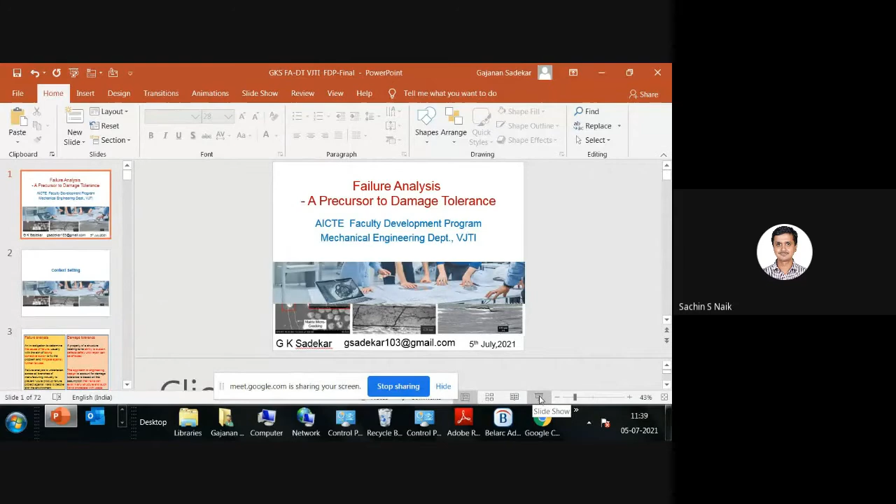Good morning, and Professor Naik, thank you very much for the very exaggerated introduction, but thank you for that. And thank you to you, VJTI, and AICTE for giving me this opportunity to share with everyone my experience, and to participate in this particular program, which is based on the theme of damage tolerance.

When Professor Naik talked to me about this particular course for the faculty development program, I readily agreed. At that time I was telling him that I will not talk on fracture mechanics or damage tolerance methodologies, but rather I'll talk on failure analysis. So he agreed upon that, and my topic's name is 'Failure Analysis: A Precursor to Damage Tolerance.' So in this presentation, let us begin by setting the context for what we are going to do in this lecture.

Damage tolerance being the theme of this presentation, I thought let us deal with how failure analysis connects to damage tolerance methodologies. That's important to understand, because over the next 5 days you are going to cover a lot on fracture mechanics in detail, having already done the first lecture on fracture mechanics. So how that gets correlated to design, and how failure analysis plays a role in this - that's what we are going to do, the context setting.

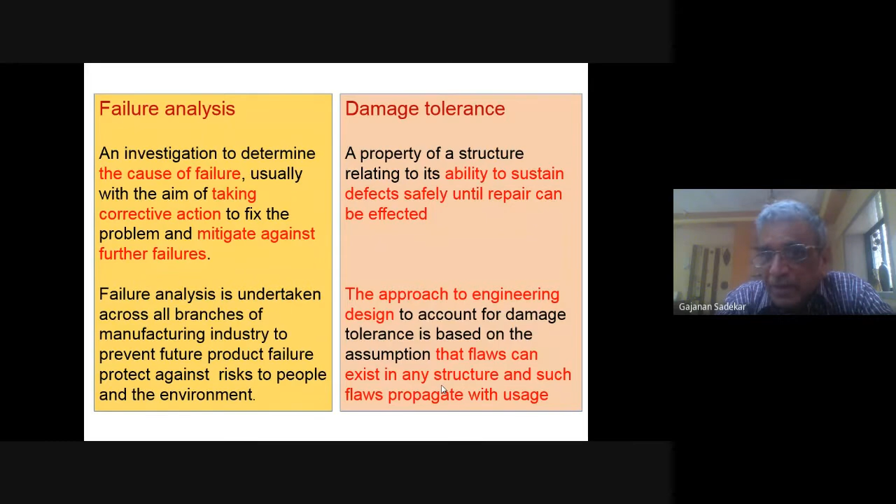The approach to engineering design to account for damage tolerance is based on the assumption that flaws can exist in any structure, and such flaws propagate with usage. Now, when they propagate, whether they are dangerous or not, that we require to know. These are the things which have got developed to help determine the remaining life or residual life of the equipment. It's very important. So let us go a little further.

So what I said here is failure analysis is carried out after the failure. We are not going to do failure analysis if the failure has not occurred. So failure analysis is done after the failure has occurred.

Whereas damage tolerance needs the data on presence of defects and evaluates defect growth under certain loading conditions. Now two things can happen here. If, suppose for example, you have manufactured the equipment and done non-destructive testing on it, and you observe a small defect available, the question comes whether this defect should be permitted or not.

How will you decide that? At that time, you may carry out the damage tolerance analysis or fracture mechanic analysis and say, yes, this I can tolerate. Or during the operation of the equipment, a situation can come where small cracks develop because of certain loading, some phenomena, or some shock. Then you want to know whether this will withstand. So in that case also, damage tolerance methods will come into view.

Now, what really happens? The defects could be developed in service, or present during manufacturing, just like what I said. Damage tolerance methodology predicts the defect growth rate and ability to sustain, as we talked about. In certain cases, for example stress corrosion or fatigue cracking, the methodology could be used to avoid development of defects by predicting the threshold loading condition. This is a very important thing—it has come very handy for me.

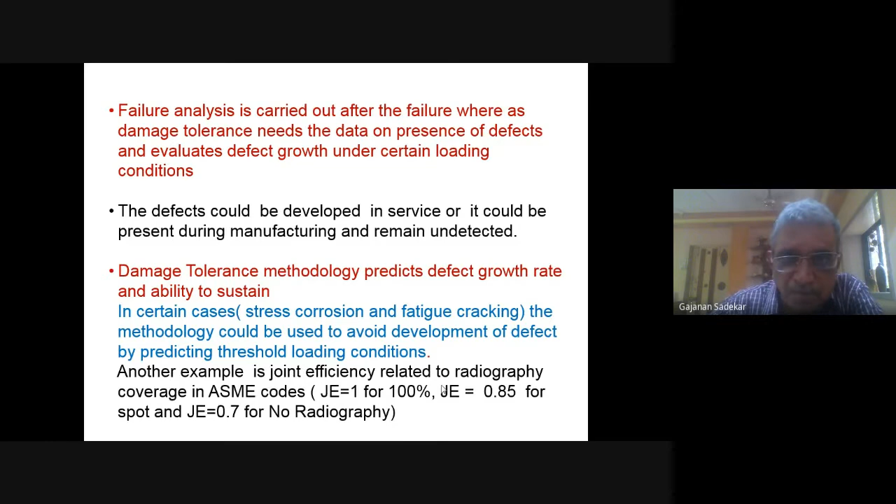The next tip to really look at is failure analysis - determine a cause, and this could facilitate damage tolerance. Now, why are we going to talk today about failure analysis? I find that whenever we are doing any analysis...

For example, fracture mechanics analysis, crack growth and things like that. But I must know what really happened - why, what is the cause of this failure? So that my analysis will become more meaningful. Because calculating the crack growth is only using the formula, which has one meaning. But when I know why this crack is occurring, what type of assumptions I should make in loading, even for crack growth propagation, I require to understand the loading which is going to occur on the equipment. So failure analysis, which determines the cause, will facilitate your analysis.

And that's the reason - because you are going to talk about damage tolerance for the next 5 days, I thought let me talk a little bit about failure analysis. Okay, now look at the purpose.

The failure analysis as well as damage tolerance really have different approaches. In one case, a failure has occurred and you are doing the analysis. In the second case, you are assuming some defects and then finding the growth rate and what will happen to it. But both have the same purpose: you want to enhance reliability of the equipment and systems. So finally, at the end of the day, all design and all analysis of whatever type you do has only one purpose - to enhance the reliability of the equipment and systems which we are designing or going to use.

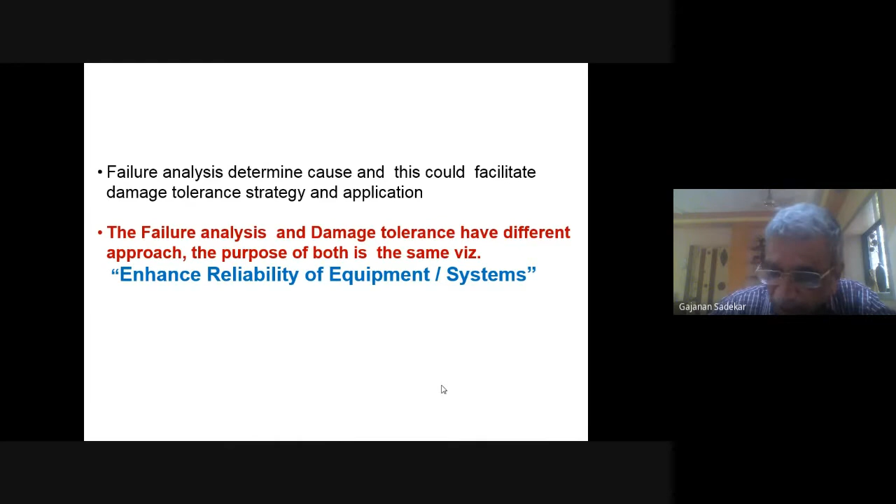Damage tolerance has a preference and a role to play, and failure analysis also has a role to play. Together, we'll start by knowing exactly what reliability means. So what we are going to discuss now, in the next 1 hour 15 minutes - because I've probably taken 15 minutes already - is the reliability concept and failure patterns, degradation and failure mechanisms, and failure analysis methodology.

I'll explain some case studies - interesting case studies of different types. They will tell you something about failure analysis, something about damage tolerance methods, something about how people have determined threshold levels in damage tolerance methods, and then we'll conclude the presentation with some concluding remarks.

Okay, so let us start with the first one, reliability concept and failure patterns. Generally, when I give this presentation in person, I ask the audience, what exactly is reliability? But today, because we are online, I will define it myself and start the discussion.

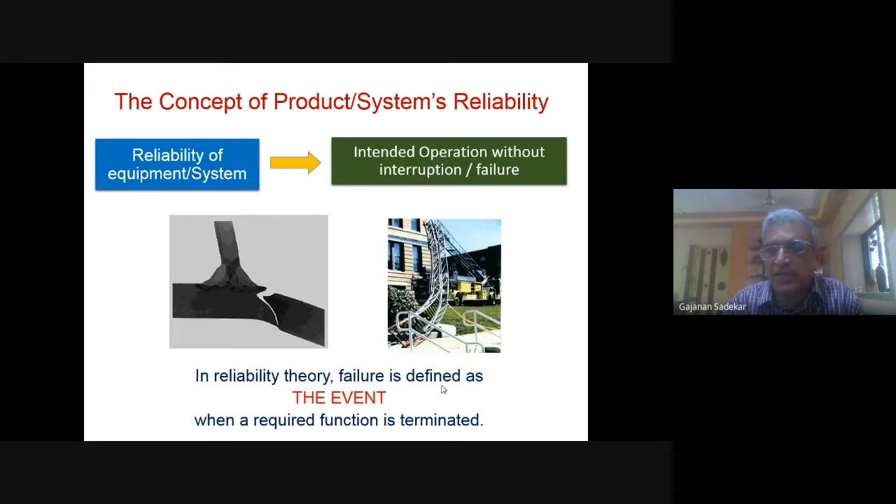So in reliability theory, failure is defined as the event when a required function is terminated. This is a nice definition I like. In reliability theory, failure is defined as the event when a required function is terminated - the function has stopped, whether temporarily or permanently.

So let us look at the types of failures. There are two types of failures. Degradation failures, where the system or component no longer functions properly - it can be repaired and made to work again. That's what happens most of the time with degradation failure. But there can also be a catastrophic failure, which is the end of the system or component's life - we cannot use it anymore. So both are possible, but most of the time we face the first one, the degradation failure.

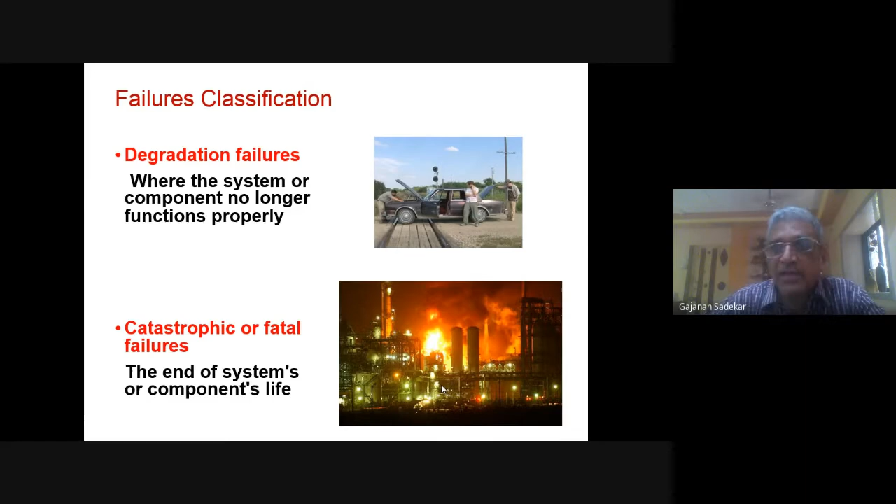Actually, this is true even for us human beings. A similar curve, which applies to equipment and systems, is applicable to all of us also.

Now, what are the reasons? Infant mortality is a result of gross defects - we'll see what those are. Then normal wear and tear or unexpected operating conditions can cause problems during the life of the equipment, like a TV or washing machine getting a small problem. And then there's result of aging, when the equipment has completely worn out and it has aged. So result of aging causes wear out.

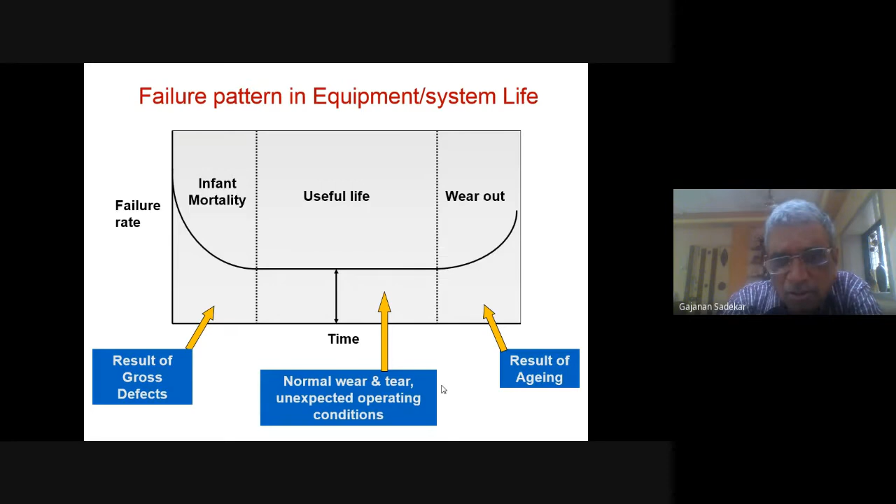Now let us look at what's important for us right now - result of gross defects. I want to explain why I'm focusing on gross defects and not discussing much on normal wear and tear and result of aging.

If you look at the gross defects, the first one is selection of inappropriate material. If you haven't chosen the material properly for the required service, it can cause fast failure. So inadequate design - your design is not proper, there are mistakes occurred, or the methods or data were not available.

Or inadequate testing of the equipment - you have manufactured the equipment, but you have not tested it properly. There are some unidentified defects remaining inside, of any type, and they cause problems afterwards.

Or startup operation - in a process plant, for example, you start the equipment and your rate of heating or rate of pressurization is very fast, and it is not able to take up those types of loads. In that case, some problem can occur.

So if you really look at these four factors, they are applicable to any equipment or system - you take a machine, anything, though I am talking about pressure equipment, actually you can take anything, any machine.

If you have not chosen the materials properly, or adequate testing is not done, cracks were already existing in some places, then infant mortality can occur immediately. If startup operation is not done properly, suddenly you give a jerk of something like that. So these four reasons are applicable to any analysis you are doing - this is required to be checked.

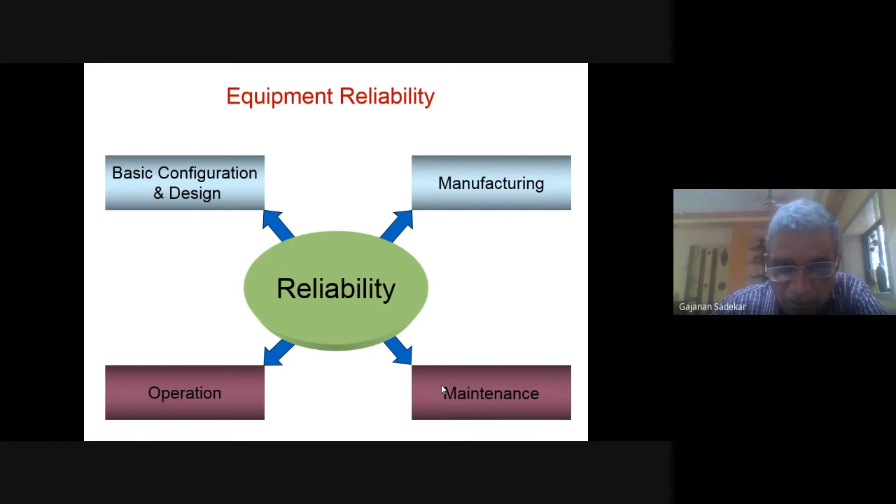Basic configuration and design. Dr. Naik, am I a little fast or slow? No, it's fine, it's going on fine.

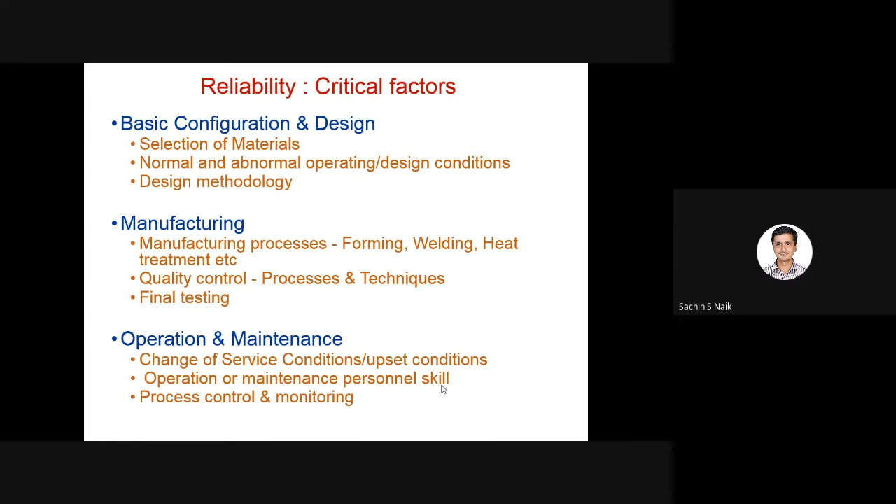Okay, fine. Now, basic configuration and design - if you really see the basic configuration, which factors come there? Selection of materials, with normal and abnormal operating design conditions.

I want to tell you something very important. Most of the people, when we start designing something, we define only one condition - these are the design conditions. But really speaking, we must know what type of abnormal or special design conditions can occur during operation of this equipment, specifically in process plants, even otherwise.

Many times, for example, if abnormal conditions are not known, you will design only for one condition, and then there can be a disaster.

During my 37 years of experience in L&T, on a few occasions I have found people don't give you the abnormal operating conditions, and then you really land in a problem. So actually many times it's good to talk to the people who operate the plant or the system, and then find out what type of problems, what type of operating condition changes occur during the lifetime cycle of the equipment. If you know those abnormal conditions, one can take care of them at the initial design stage itself.

Many of the process licensors, or the people who prepare the specification for equipment, don't only specify the design condition, they also specify other conditions based on experience. That is the reason specifications in many industries, if you see the specification of the equipment 20 years back and today, may not be the same, because some experience has come and those experiences get incorporated into the specification. Sometimes people feel they are becoming more stringent, but they are not becoming stringent -- some experience has come and that experience is getting incorporated into the specification.

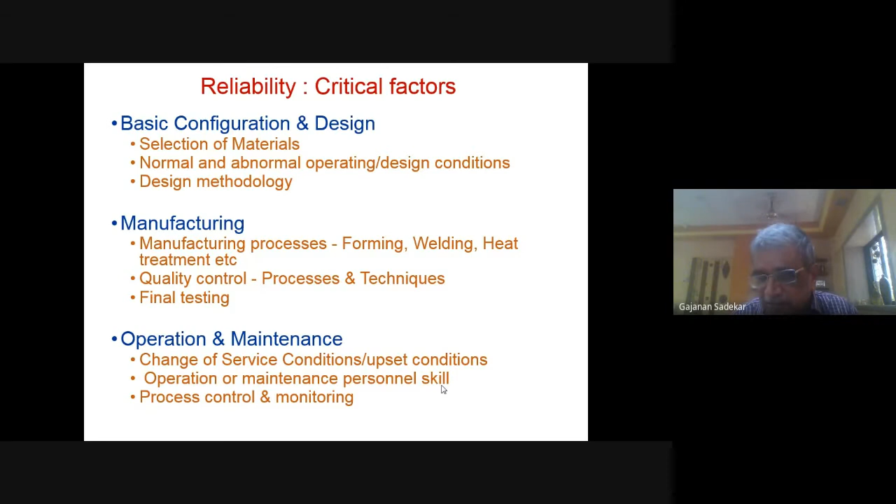Then process control and monitoring, how well you are controlling your processes. So reliability, if you really look at these factors, they are critical factors which determine the reliability of the equipment, right? So let us now look at what degradation or failure mechanisms can occur.

Now here I want to tell you, because my experience, as I mentioned earlier, my experience being on a pressure equipment, because I work for the refinery, fertilizer and petrochemical and the power plant and all that. Mostly I was dealing with the pressure equipment. So most of the talk will be around that. But everything is applicable to most of the other general equipment and systems. The nitty-gritty may change, but the principles will not change.

Now, general types of degradation mechanism that can cause failure of the pressure equipment, for example, any pressure vessel. So, mechanical cracking and damage. This mechanical cracking and damage can occur because of many things. You may not have designed it properly, it is not able to sustain the pressure. This can occur. Or, for example, some defects may remain, and those type of things can grow and then cause the problem, right?

General and localized corrosion and erosion. Yes, for example, corrosion can occur generally. If you have not selected the material properly, there can be corrosion because some environmental factor comes in contact with that. For example, if you take piping, you have kept very high velocities inside the piping, and there are particles inside, erosion can occur. In a heat exchanger, similar things can occur, depending upon the surface. For example, if you have not provided any protective covering for some of the equipment internals, then it can cause erosion. So one has to look into these. These are the general degradation mechanisms.

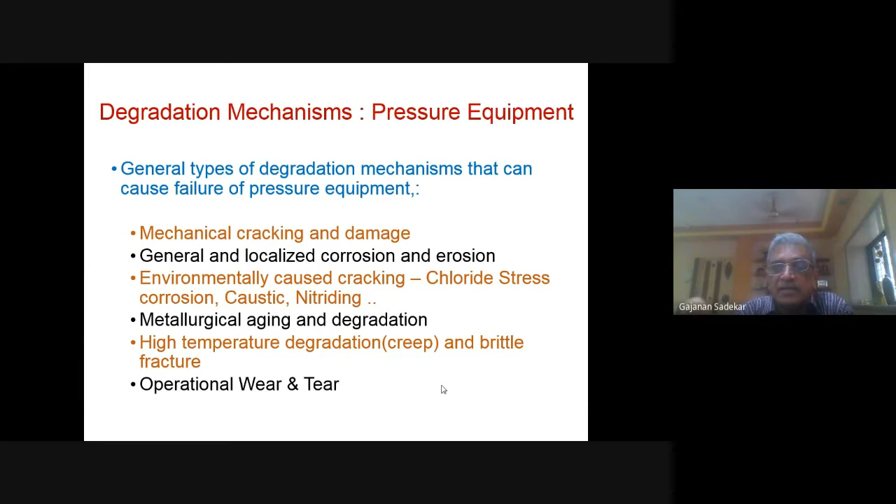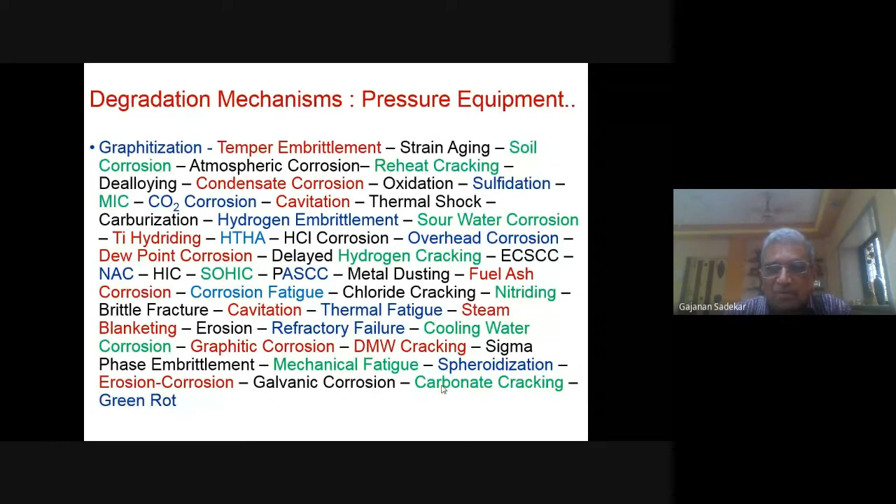And then I just listed here, I'm not going to go through this slide at all, but just to show you various degradation mechanisms which can occur, starting from graphitization and ending with carbonate cracking and all that type of thing. So I'm not going to explain any one of this, but this is just to give you a slide which makes you think a little, looking at so many phenomena to consider.

Okay, then this is very important. If you really look at some type of service which requires special attention, because by now, as I mentioned earlier, based on the experience, many specifications tell you saying that this service is of this type, you require to take care in this type.

Even people specify, if my service is of this type, what hardness I should maintain while welding on my weld, because based on experience, those norms have been developed. So pay specific attention. I'll give some references where you can look this up and get this information.

For example, lethal service, fatigue if it's cyclic loading, you should really pay attention to that. Brittle, low temperature service, high temperature, high shock or vibration, environments where hydrogen or ammonia is present, compressed air, caustic solutions, or chlorides are there. All these types of environments are things one should look into specially while designing, selecting the material, and making provisions in the design. That is very, very important to do.

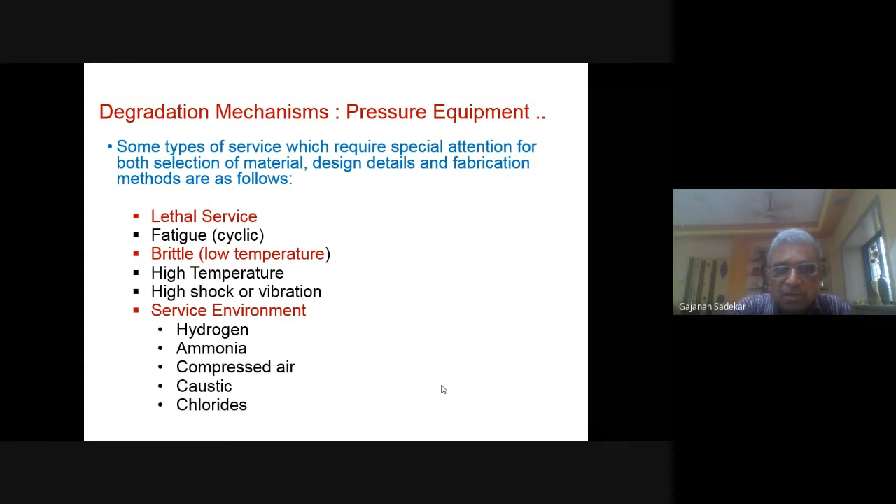So this just gives you a little brief about that. And I mentioned, when you get this presentation recording, you'll have these references. API RP571, damage mechanisms affecting fixed equipment in the refinery industry.

It is written for the non-materials, non-corrosion specialists, okay, but that's a comment. For the refinery industry, it is actually a very, very nice standard. Somebody can say, oh, it's just a standard, how will it help? But I'll tell you, the theory explained in this particular API standard is very, very interesting. If you get the opportunity, please look at it.

Specifically fitness for service. This includes fracture toughness and crack growth estimation. And I want to tell you, this standard, which is an ASME adopted standard also, API 579, talks about residual life assessment or remaining life assessment. This is a very nice standard. All of you can have a look at it if you get some time.

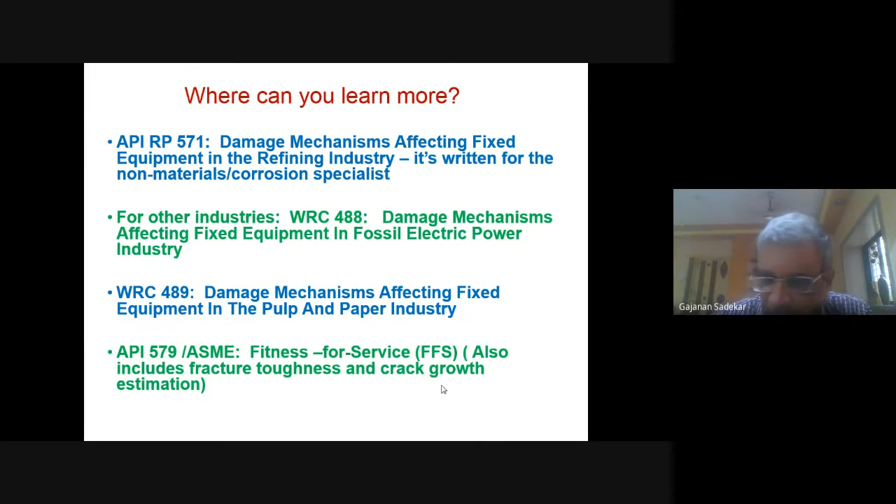Okay, thank you. Now we'll go a little further. Having seen that, we are going to now discuss the failure analysis methodology.

So, failure analysis methodology, why are you doing the failure analysis? We have already talked about it, but to repeat again: the basic objective is to find out the primary cause of the failure, and after taking corrective action, suitable measures to be taken to avoid recurrence in future based on the root cause analysis.

Now, that's what I mentioned here, the root cause analysis. When you do the failure analysis, you get the immediate cause of why it has failed. But why that cause has occurred, you will not know from failure analysis alone, right? So for that, you require to do the root cause analysis. There's a difference between failure analysis and root cause analysis.

Failure analysis: failure has occurred, I'm finding the cause, how that failure has occurred. Why that cause has occurred requires a separate study. Many times, immediately you do the failure analysis, and afterwards, once you take corrective action, then you start doing the root cause analysis in order to avoid future problems. But root cause analysis is a very, very in-depth study. I'm not going to cover that part here. We will be talking only about failure cause analysis, which is done immediately on the failure.

So most of the steps given here are for pressure equipment related, or even machinery. For example, some machines fail, you can use this particular thing. The methodology, though specific sometimes, is also very generic, and you can utilize it for any analysis when doing the failure analysis of any equipment.

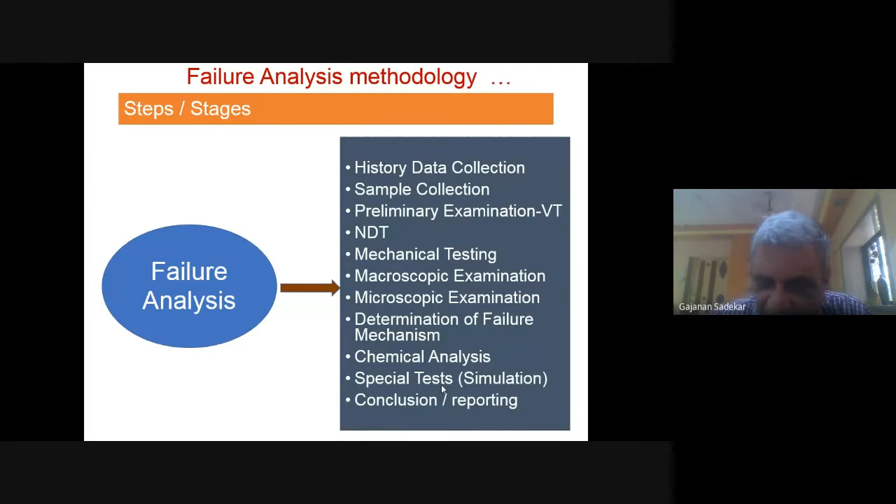Okay, so let us go to the first one. So you will find on each one of the slides I have put to-do items and what is the goal of doing this particular thing. Why we are doing this particular test and what is to be done.

Don't even analyze. Many times people start, as soon as they get into this historic data collection, they start analyzing. I don't do that. I just say that I'll collect the data, I'll do the analysis later. Because when I start collecting, there's a possibility that I'll miss collecting some data. So when you are collecting data, have a look at it to see the completion of the data, but don't try to analyze it. Never. Because if you start analyzing parallelly, you lose the things. You only see whether whatever data is required, am I getting it or not.

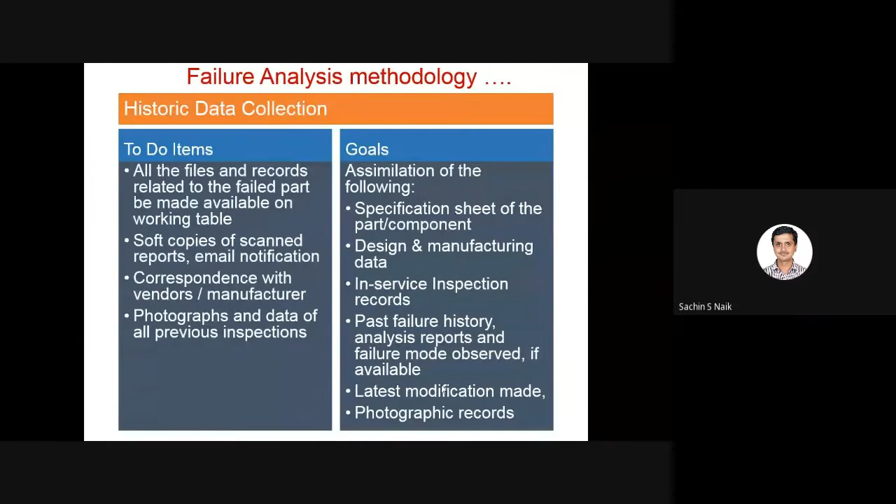Sorry, you might have got disturbed a little. Is it okay? Are you able to hear me? Hello? Yes, sir, yes. Yeah, so there was a call, so we got a little disturbed. Okay, now, yeah.

So latest modification made is very important, because what happens is suddenly somebody gets an idea saying, oh, if I do this change now, we'll get better productivity or better yield of the product, and capacity will improve. So people make that change, but they don't understand that such changes will have some effect on other equipment. That's why it's better to collect data related to the modifications made, along with photographic records and all that—each has a purpose.

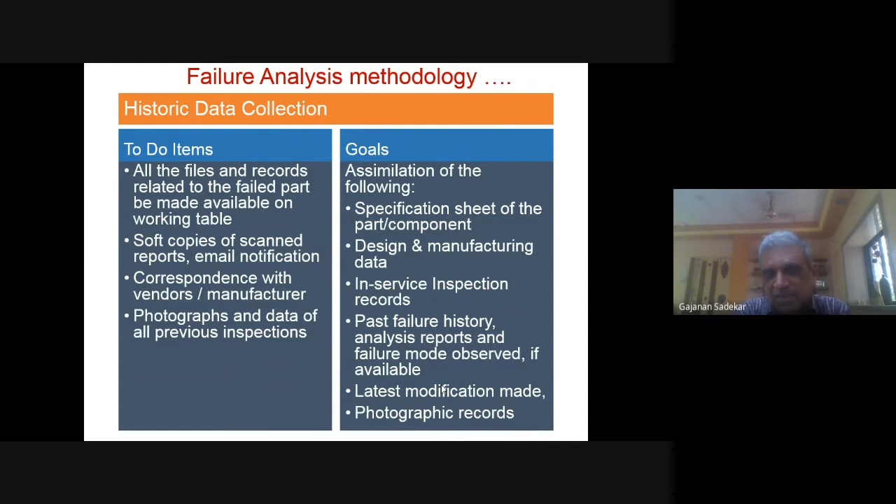So first we collected the information, and we had a purpose for it. Now let us go to the next one: sample collection.

For this, suppose the equipment is at some site—the first thing is to reach the site at the earliest. It's very important. I can tell you, many times I used to travel. If you come to know the equipment has failed, and somebody tells you it has failed today, I would say I'll come tomorrow morning, or sometimes travel at night, because the earlier you reach the site, the more correct the inputs you will get.

Because many times, in a hurry, people disturb things—not on purpose, but in a hurry they make changes, start cleaning and things like that. Actually, if a failure has occurred, nothing should be cleaned before somebody observes it. I'm very clear about this—I used to get samples from the site, and when the samples came to our place, people would say, oh, the samples have come, let's clean it. I'd say, nothing doing, nobody will touch it, because uncleaned samples are important to observe.

That's the samples part of it. So, go to the site immediately, look at the failed parts and pieces, survey the whole area along with the operating staff—the people who operated the plant. I'll tell this story later during the case study discussion. It's important to talk to the operating people, discuss with the operating staff, and listen carefully to eyewitnesses if any, because they will give you important information.

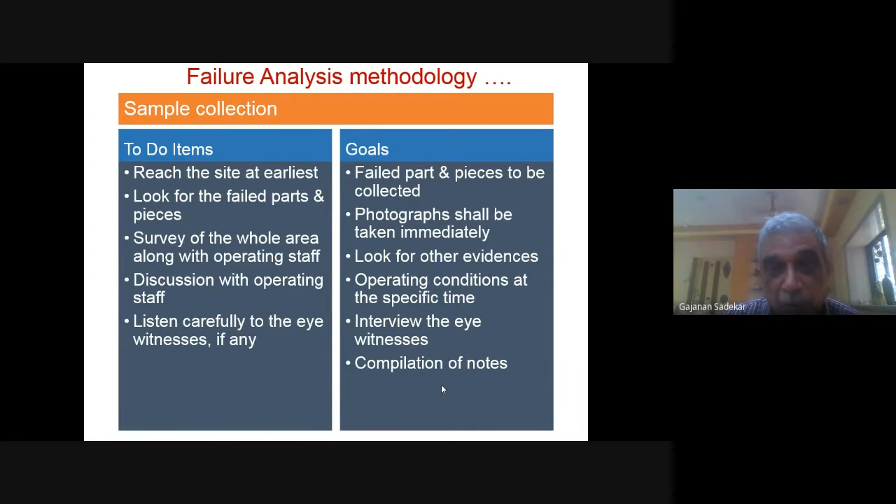Many times what happens is people say, I'll write the notes in the evening. That's what many of us do. But I used to immediately, however long it takes, make notes. It may not be very elaborate, but every point important to the failure analysis should be noted. You may not analyze it then, but noting down those points means you can look at it a little later. Next is the preliminary examination.

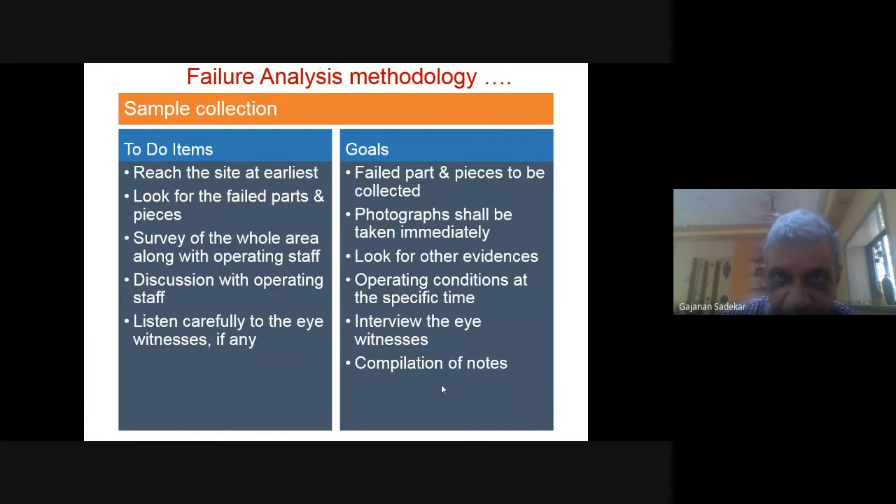Even experts can say this part was cracked or failed two months back, because by looking at the color they can tell this failure occurred yesterday - the surface may be shining or have a different texture. People are very expert at this. So you should look at all this and have a group discussion with the inspectors.

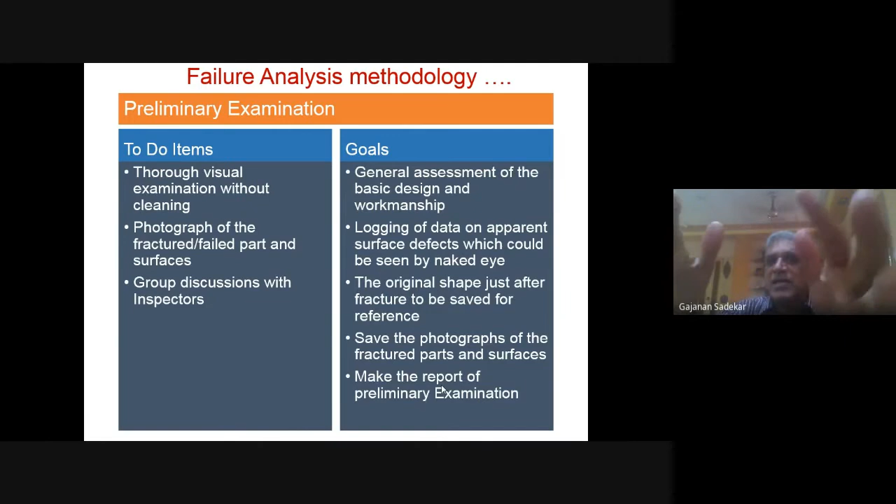The original shape just after fracture - save the photographs of that. So you will find the goals are more or less common in every examination. In some examinations they vary, but in these first three or four examinations - preliminary examination, sample collection, history - they are more or less the same. Basically, it's about collecting as much information as possible.

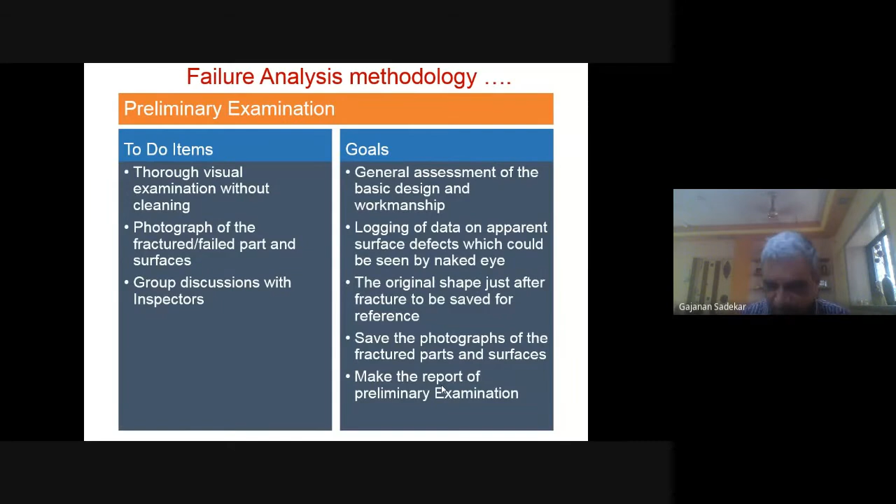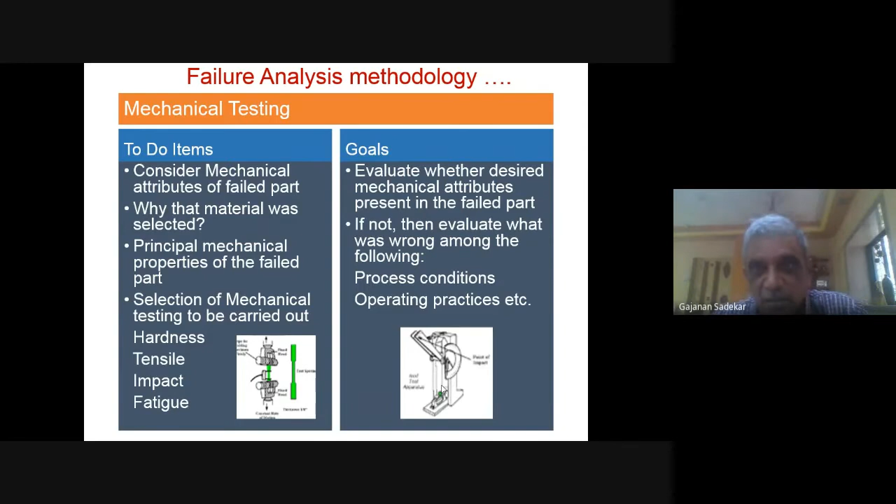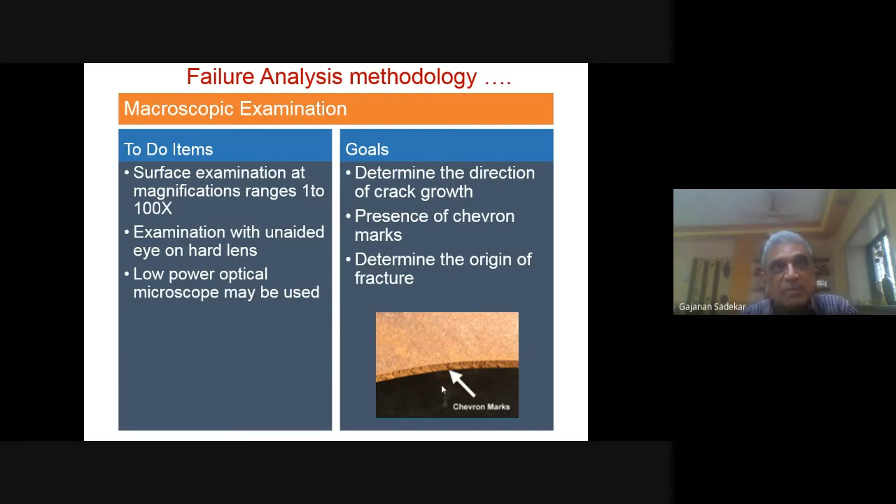Then microscopic examination: the transmission electron microscope is used for magnification up to 1500, and the scanning electron microscope, called SEM, for magnification of 10,000x to 60,000x. So depending upon what you are studying, use the appropriate equipment to study those microstructures.

Determination of dimpled fracture, cleavage facets, brittle and intergranular fracture, hydrogen embrittlement, and fatigue failure. I want to tell you, when I show you one example covering most of this examination, I'll demonstrate what happened in the actual case. The photographs put here are not actual, they are just to give you a little feel of this part.

So look at this: cleavage, brittle, intergranular fracture. If you study that particular thing, you come to know how it has occurred, whether hydrogen embrittlement has occurred in the material, or it's a fatigue failure. All will come to know by looking at the microstructure.

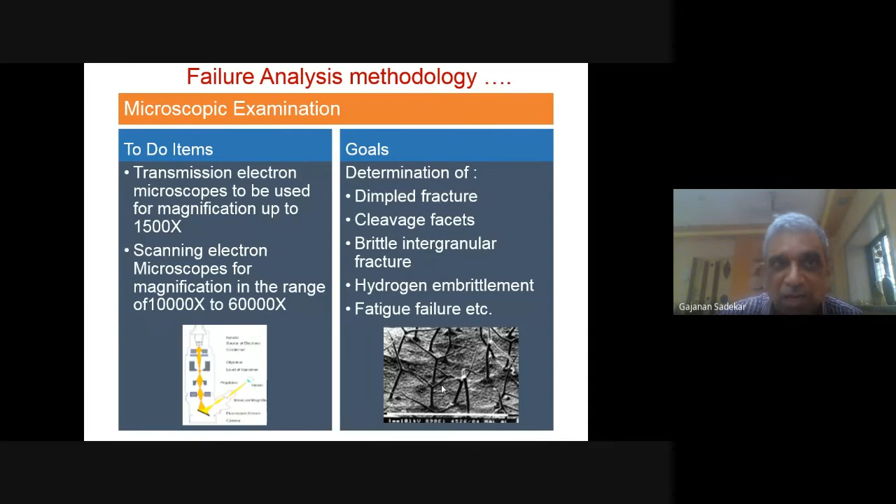So that is very important to study. Next one is the metallographic examination.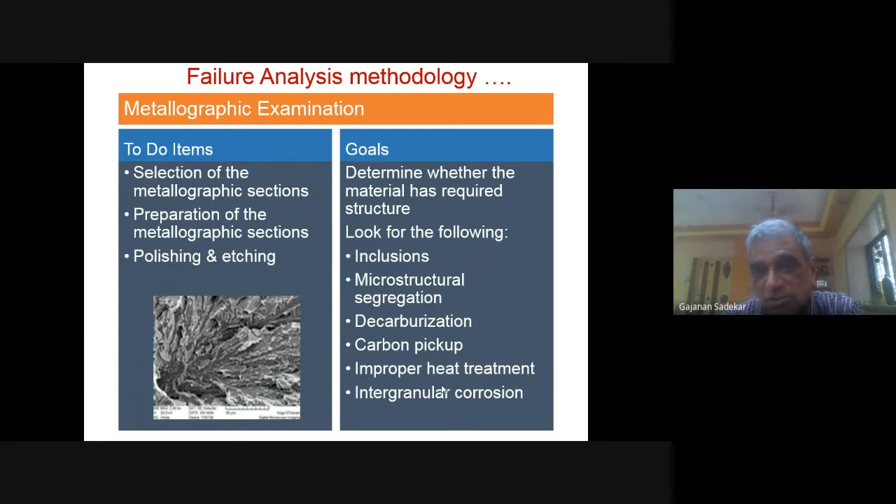Actually, I'm going to tell you the story on stress corrosion cracking, how I found out in one particular place. I was not even knowing at that time what stress corrosion cracking is, but I'll tell you the story of that at the appropriate time.

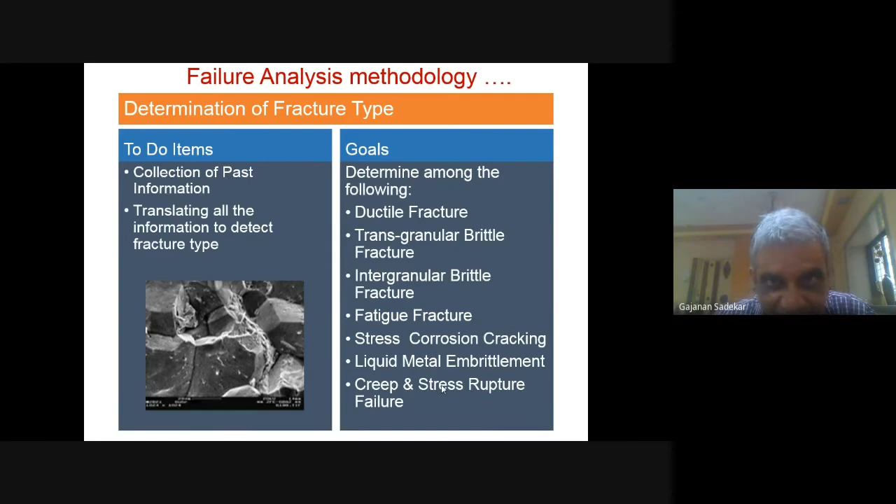For example, many times in a heat exchanger we take the tube samples and check whether by chance the tube material was defective, whether it was meeting the requirement or not. Sometimes by mistake, different tubes come from a different source and get mixed up, so you check whether the material that is supposed to be used was actually used or not.

So you can take the sample, carry out the chemical analysis. It will tell you whether it's meeting the requirements or not meeting the requirements, what type of alloying elements were supposed to be there, and whether they were sufficient or not.

You might not have really studied the test certificate well in the beginning, but when failure occurs, you require to study it in detail. It is important to study it even in the beginning.

For example, I will tell you, though I used to do the design and things like that for a few years in L&T, I used to make sure that all material test certificates would come to me even before manufacturing. Though I was in a design head role, I used to have a cursory glance at those, to check whether they were meeting all the requirements or not.

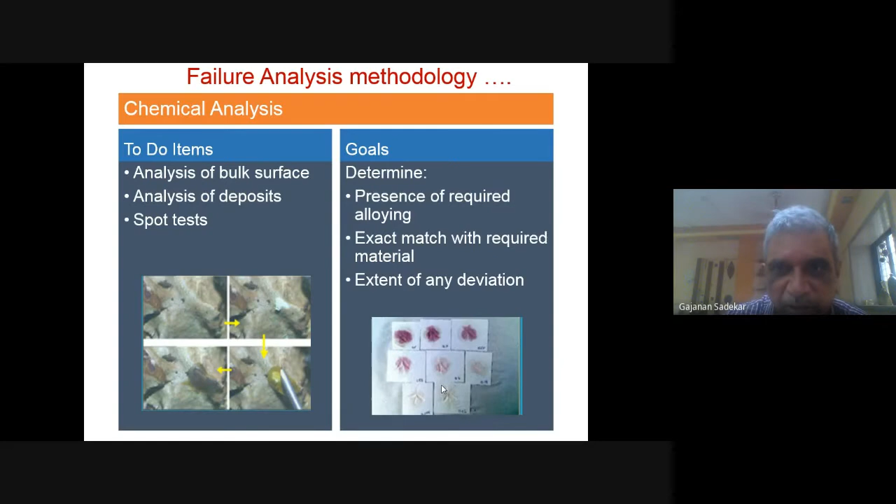And though our quality assurance department used to check, we used to do a double check of it, so that whatever requirements we had specified, whether they were met or not met, that's very important to see. And is there any deviation? What's the extent of any deviation and all that.

And then next, as I said some time back, suppose for example it is not possible to take something from the equipment, then I can do a simulation of it. So I'll say, I cannot take the sample, so I take the same material, use some cycles or whatever loading conditions, and do the simulation of it.

So recurrence of failure can be seen, whether this particular thing is caused because of this phenomenon - that can be done by simulation. Suppose it's fatigue failure, you may not be able to test for long cycles, but some tests can be done, some accelerated tests can be done.

So, for example, accelerated corrosion tests are available. One can say, if it's a corrosion failure, I can take this material and carry out an accelerated corrosion test and see, oh, this type of corrosion can occur, and there are correlations available. So simulation can be done in order to study that.

I want to tell you, sometimes in a failure analysis, which I did many, but one particular failure analysis I was so involved, I said every step will be done only in a series, nothing in parallel. Reason being, when you start doing things in parallel, you miss some steps. So every step we should do in series: we'll do one particular testing, then take a decision whether to do further testing, what type of testing, what modification I should do. So after every test completion, I used to study it completely and draw conclusions saying what is required to study for this.

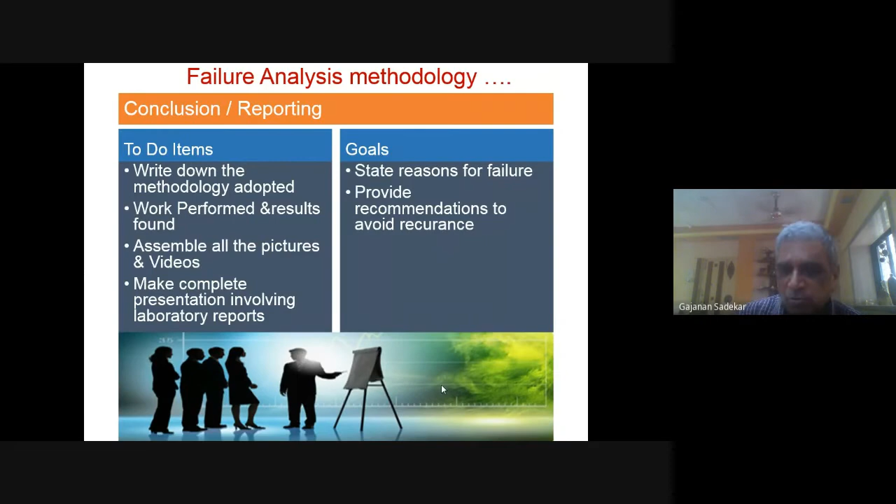So now what we are going to do, having seen that, we are going to see the case studies. Okay, so we are going to study the case studies. That's what we start now.

So I want to say something here. I have chosen 4 case studies. The first case study may not be related to damage tolerance to that extent, but it shows the complete failure analysis methodology we discussed, every step of it, including preliminary examination, visual examination, macro, micro - everything has been done, and then we draw conclusions. So this is one example.

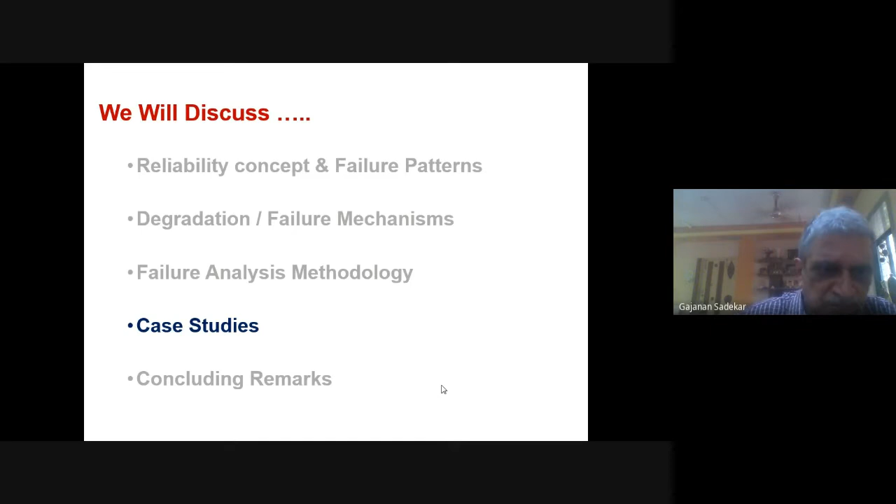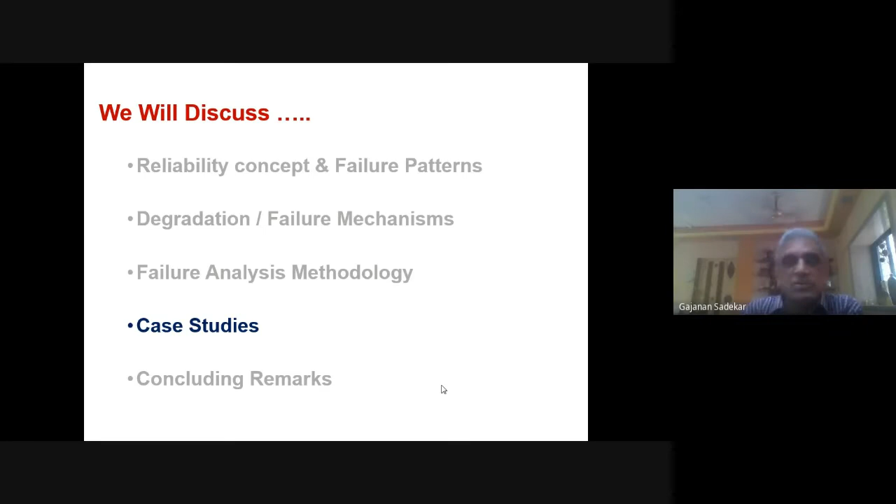The third case is actually equipment that was supplied where some defects were observed in operation, and it was very essential to do crack growth studies. So that was carried out - I'll tell you about crack growth and damage tolerance and how it was done for that equipment. The fourth one is how somebody developed threshold levels which help design equipment, so you people can also think about how to do that type of thing in the future. So this is a combination of the 4 cases.

This equipment was manufactured in a typical fashion because inside there are a lot of internals, since this equipment is filled up with catalyst. To store this catalyst and allow for flow, there's a specific arrangement inside, because the synthesis gas, a mixture of hydrogen and nitrogen, with a small amount of ammonia, flows inside. The hydrogen and nitrogen react and get converted into ammonia. What goes out is also a mixture of ammonia, but the ammonia percentage will be higher than at the inlet because the reaction has taken place.

And then along that mixture flows further. Now this equipment actually, as I said, thickness 169, is a very interesting thing.

The shell material for this particular case was 3 chrome moly vanadium steel, called chrome moly vanadium steel, and it is very high strength. If I had used 2¼ chrome 1 moly steel instead, the thickness would have been around 250 to 300 millimeters, whereas this material is very high strength.

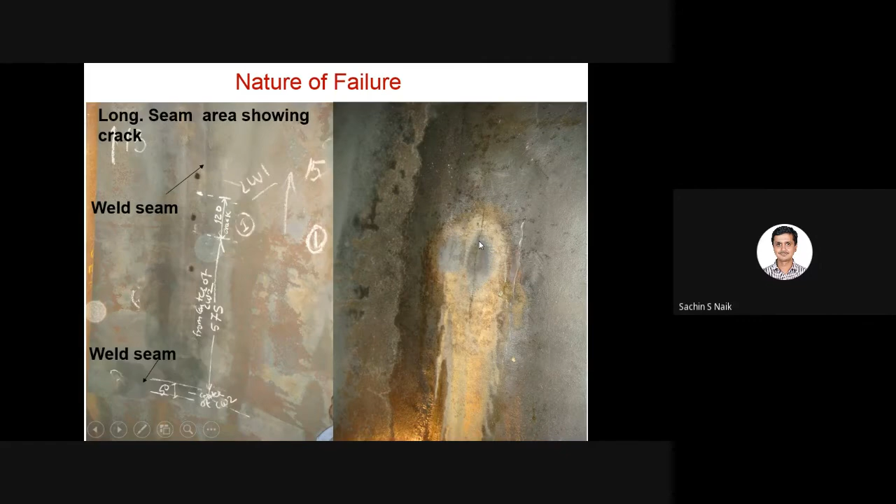Then we went in, after they removed the catalyst inside, and we had actually seen the surface. So this is the photograph. I don't know whether you are able to see it properly. I'm sure, are you able to see it? Yes sir, yes. So if you see, this is the weld.

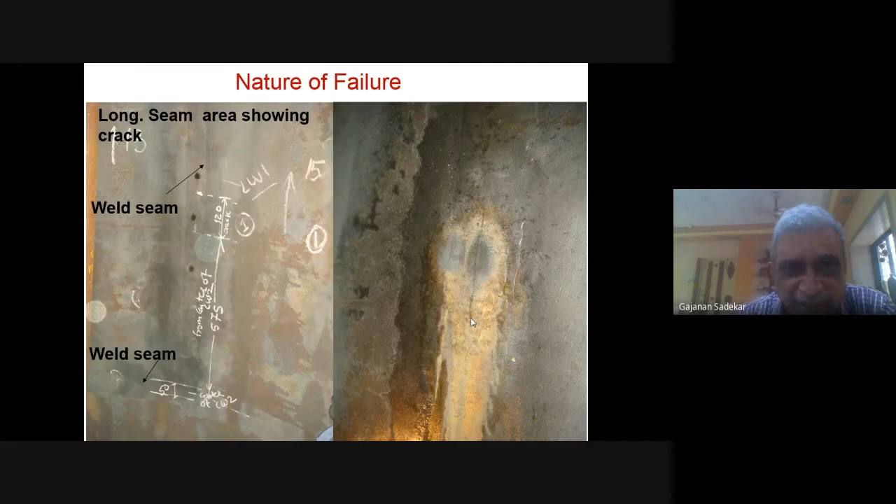This is the weld seam, and here is a close photograph of that showing the crack on the weld seam. Can you see this crack? So there was a crack, and definitely this crack has gone throughout the section, then only the leakage will occur. If it had not gone through this particular thing, it would not have leaked, right?

So this crack was there. Like that, there were many cracks - not many, but at the bottom portion of it, there were 2-3 places with cracks, on the sub seams as well as on weld seams.

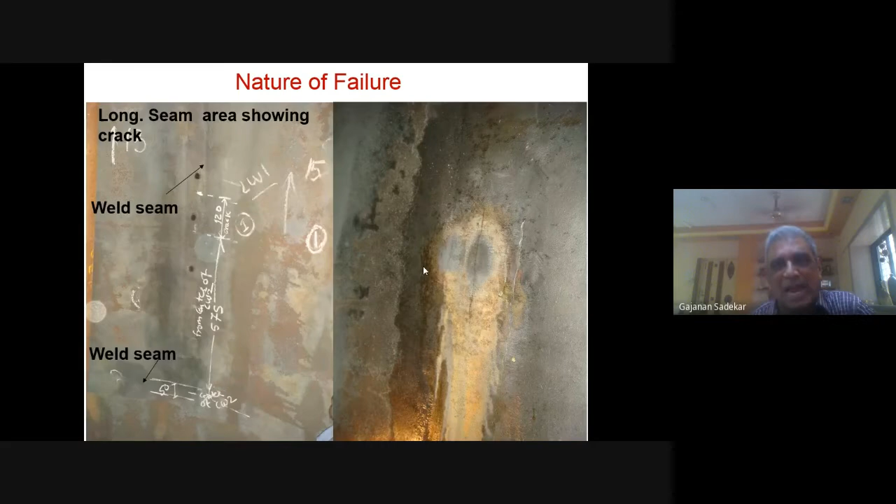So what we did in this case, because it was not possible to work on this equipment, it was decided that anyway, let us cut the sample around that, because repairing in process was not possible since the crack was throughout that particular thing. So we decided to take out the portion of it.

So these are the samples taken. Inside, the longitudinal crack was around 120 millimeters long, and outside the same crack was looking like 85 millimeters long. This means the crack started from inside, it has not gone fully through, it went only 85 millimeters.

Okay, so these are the photographs of the crack sample which you had taken. And then what we did is, we did it on the equipment itself, but also we did it on a sample.

So we did a hardness measurement of the full equipment. Look at the hardness - you will not believe this equipment is 3 meters in diameter and around 20 meters long. At particular regular intervals, we did hardness testing of the complete inside surface. A lot of internals were removed, everything was done, and the hardness was measured.

If you look at the hardness numbers, high hardness was observed on the welds specifically, but not on all welds. Some welds had high hardness, some did not. This one went up to 614 VHN, and on base material at some places it was 438.

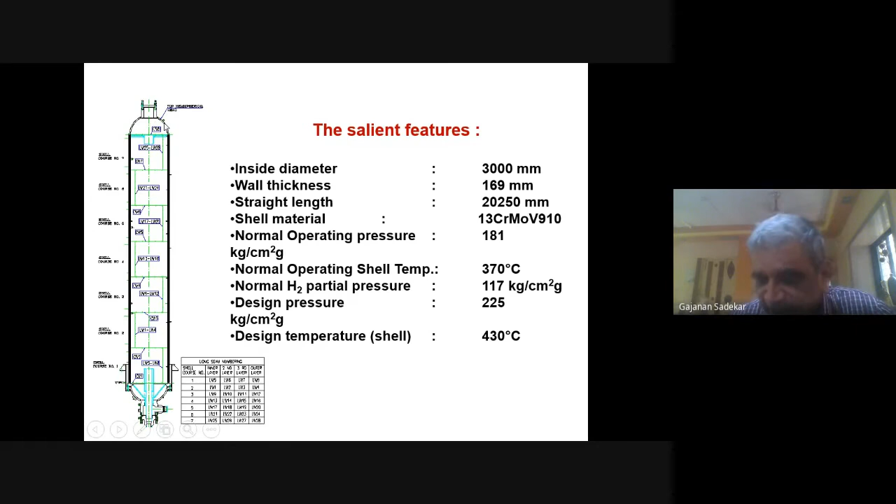Hardness at top division - now why it is mentioned under top division, I'll tell you, going back to the slide. In this case, gas is to enter inside through some internal arrangement. This gas will be present there only at 370 degrees centigrade, and this inlet gas has a different composition, and also a different temperature, because as the gas flows down, the reaction occurs and the temperature of the gas increases at this place. Because this particular catalyst is filled below this portion, at the top section there is no catalyst inside.

So that one had 195 to 251 VHN. Actually this number is very close to the original hardness, so this observation is very important. This means the top portion had the basic hardness which was originally there, while other places hardness had gone up. So all these hardness measurements were carried out, and then we got the data on the hardness.

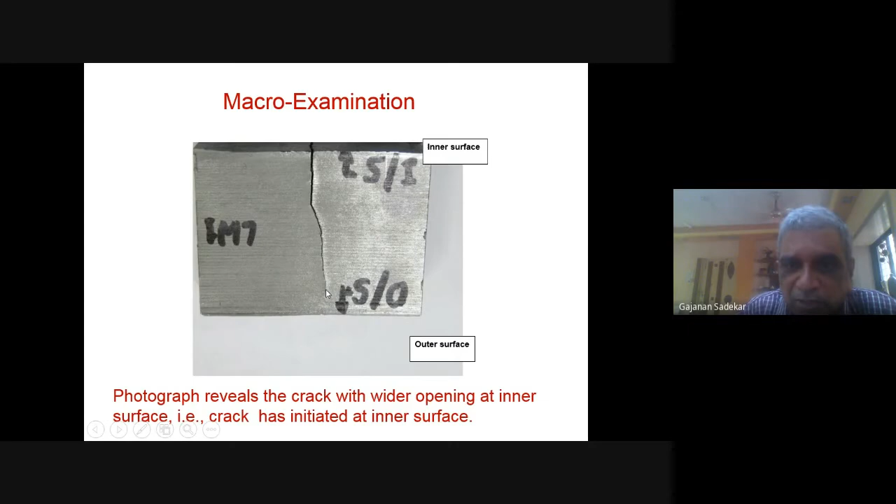Then macro examination - look at this macro examination. The photograph reveals the crack with a wider opening at the inner surface, and slowly as it goes outward, the opening was reducing. This means the crack initiated from the inner surface.

Then micro examination of it. Photomicrograph of intergranular cracks observed in the weld metal sample removed from there - look at these cracks. They are intergranular cracks and they are branching, a lot of branching of those cracks.

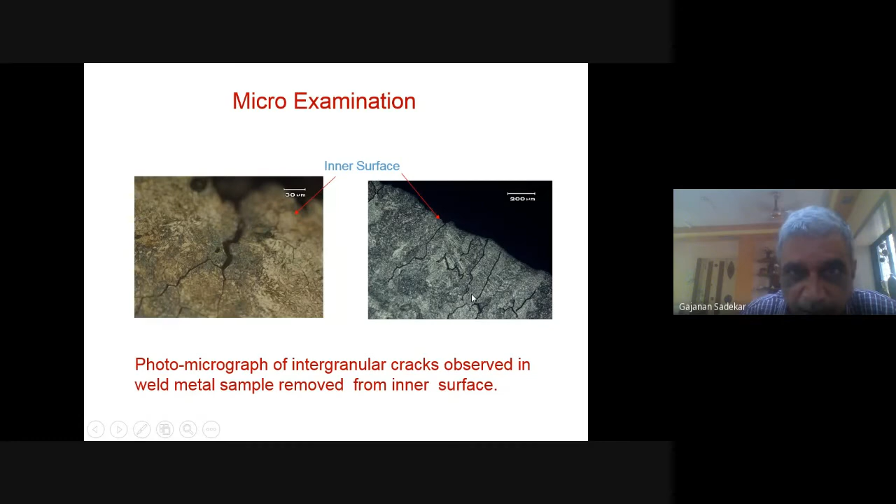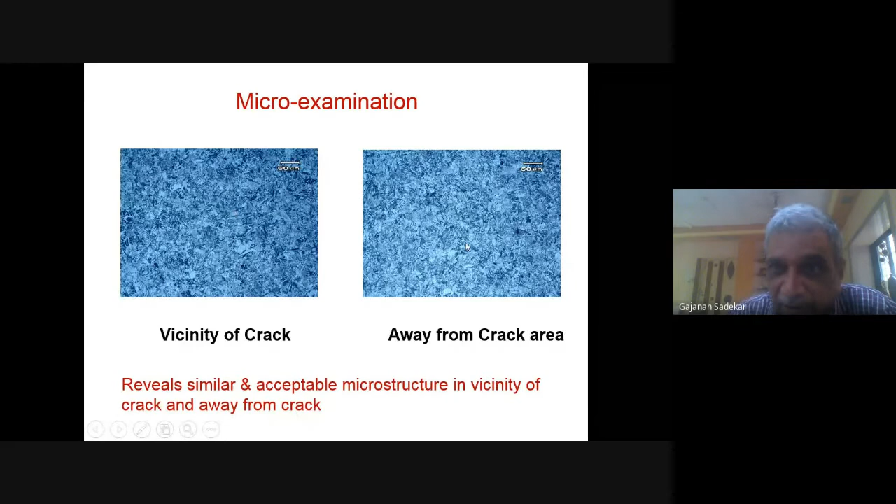Micro examination again reveals similar results in the vicinity of the crack and away from the crack area - similar and acceptable microstructure. In the vicinity of the crack, microstructure was okay, and away from the crack also microstructure was okay. But what happened in the other area we'll see.

Now look at this particular thing, where the cracks have occurred parallel to the inner surface - photograph of intergranular cracks observed in the base metal. They are intergranular cracks. Okay, that was a very important thing to note.

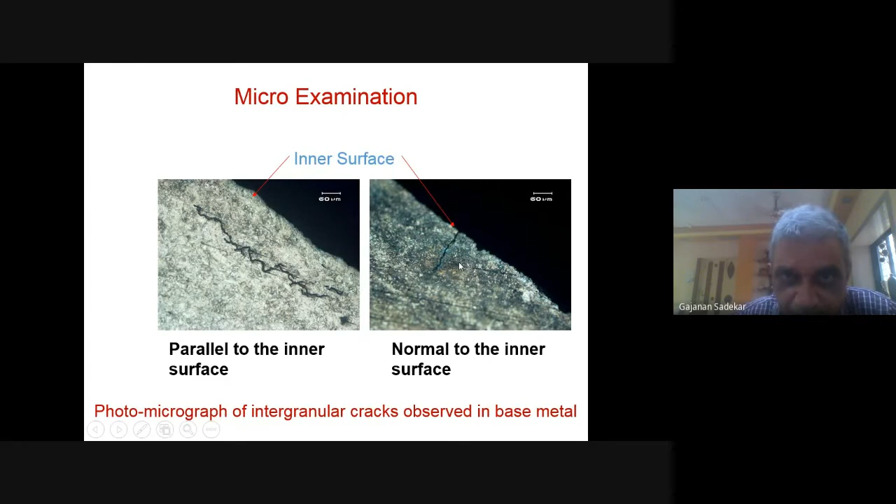So if I summarize all this, whatever we have done in the microscopic examination of a transverse specimen in the vicinity of the crack and away from the crack showed similar and acceptable microstructure. Microscopic examination did not show any weld defect, reheat, or stress relief cracking. One can say, because I am a manufacturer, I am trying to say that manufacturing was nothing wrong. That's possible, but...

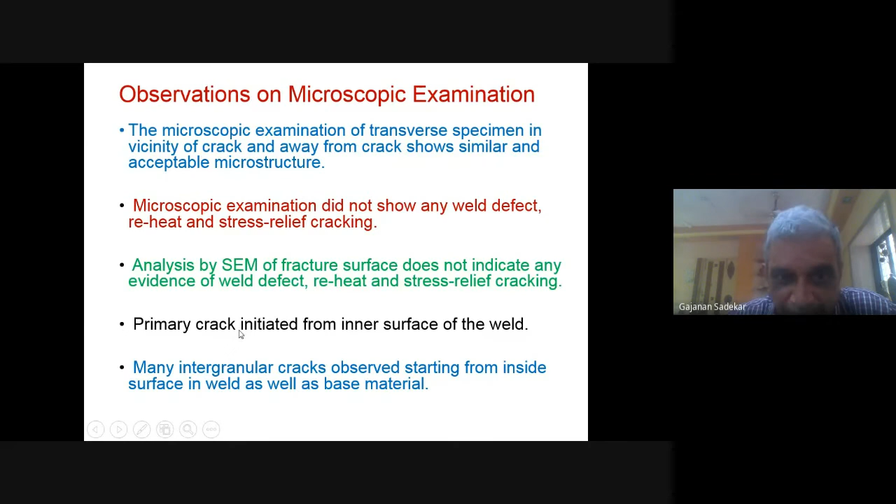Some observations - for example, analysis by SEM of the fracture surface does not indicate any evidence of weld defect. The primary crack initiated from the inner surface and many intergranular cracks were observed. Then we did a macro examination using the scanning electron microscope. If you look at these photographs, it reveals a slant surface aspect with a flat facet at the inner weld surface.

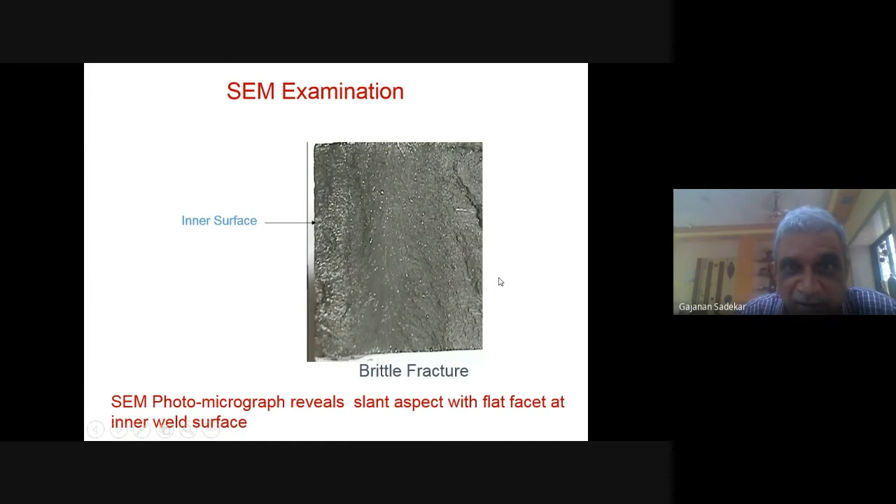Then at the photo microscope level, the rock-candy structure reveals voids - can you see these voids? There are voids which indicate that hydrogen attack has occurred on the material.

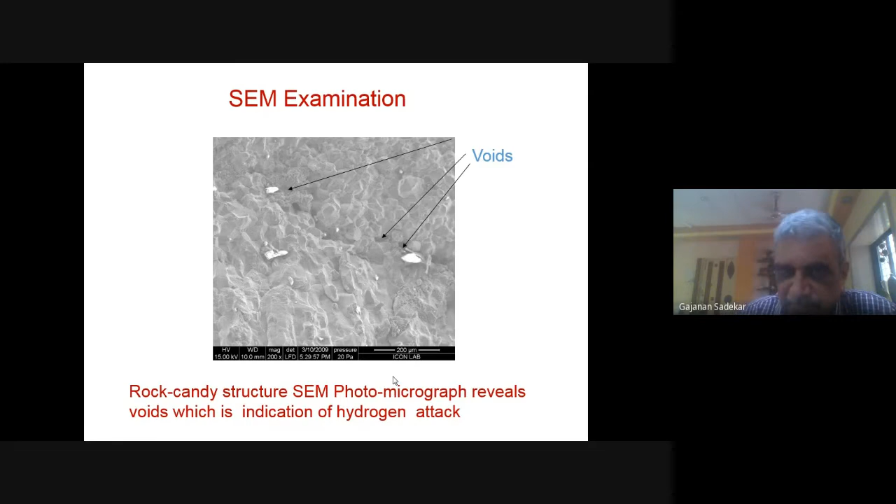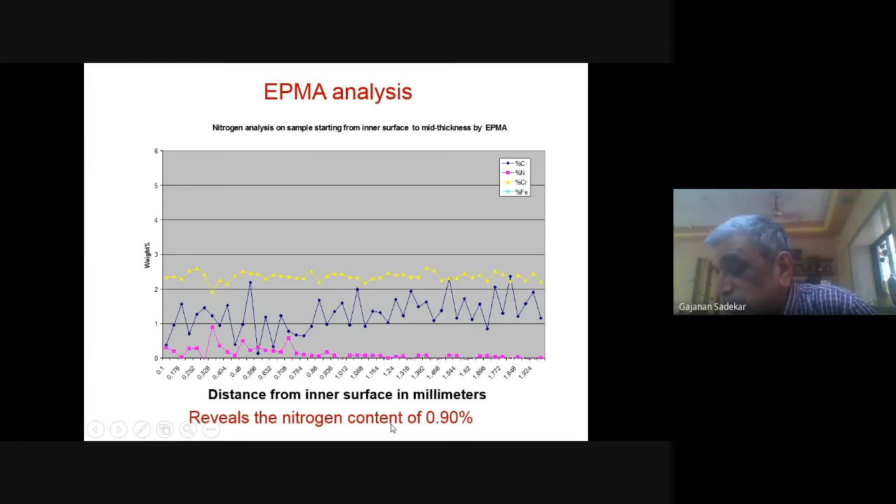Then we did the EPMA, that is electron probe micro analyzer, to know the composition of that particular substance. We found the distance from the inner surface in millimeters plotted against weight percentage, to see whether nitrogen had gone into the surface. This reveals that nitrogen content was 0.9%, which was not originally in the material. So that's a very important observation.

So if you look at this overall summary, cracks are observed normal to the inner surface of the base material. Secondary cracks are observed along the primary crack wherever the crack encountered fine grains.

SEM fracture surface showed crack initiation from the inside surface. Then EDS, EPMA, and metal chip analysis, this is energy dispersive analysis, revealed the presence of nitrogen. The pickup of nitrogen and formation of possible nitrides and carbonitrides in this grade of chrome molybdenum vanadium material led to an increase in hardness.

Why increase hardness? Because of the grade, the carbonitrides are formed, which will be a hardened material. So the hardness has increased.

SEM of the fracture surface showed rock candy structure typical of hydrogen attack, and the transverse section of the specimen, both the shell sample and the scallop, you don't worry about the internals, for example, the fish eye yawning of the grain boundaries, typical hydrogen attack. So that was the conclusion drawn from here.

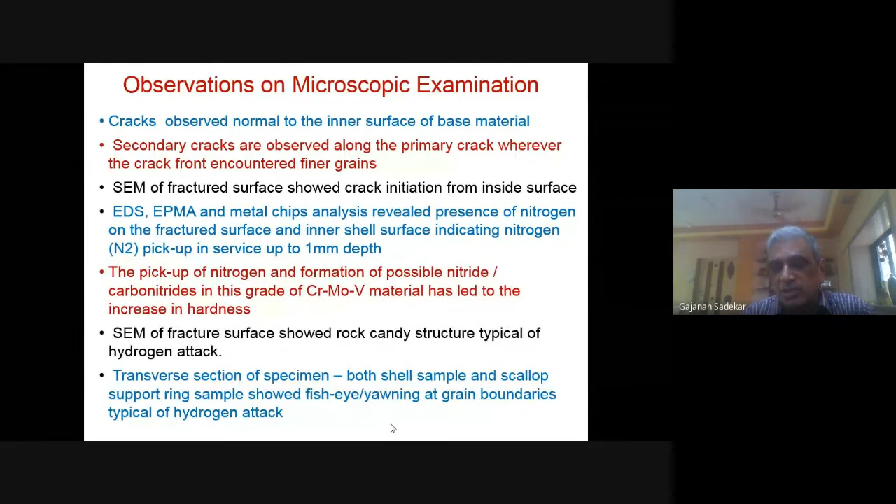Based on all these things, we drew the conclusion that the cracking which occurred in this particular case is because of the presence of nitriding and hydrogen. So pickup of nitrogen as observed in the analysis and subsequent increase in hardness due to nitriding resulted in a high increase in hardness, causing embrittlement in the material and sensitivity to hydrogen attack.

Once the material became sensitive to embrittlement due to nitriding, hydrogen attack occurred more, hydrogen embrittlement occurred, and the cracking initiated on the inside surface.

Considering the manufacturing records, we wanted to study, though I haven't shown you, all the manufacturing records we collected. We analyzed them to see the original hardness at various places, the composition, all that I talked about during the discussion of methodology. We found everything was normal at that time. Then we drew the conclusion that this happened because of a thermochemical effect resulting from the specific process condition causing embrittlement due to nitridation.

This means the process gas came in contact with the surface, which was not supposed to happen because there are some internals which are there. Those internals actually got damaged, and because they got damaged, the catalyst came in contact with the surface of the equipment, which caused the reaction to occur on the surface, and thereby nitriding occurred, hydrogen attack occurred, and the failure occurred.

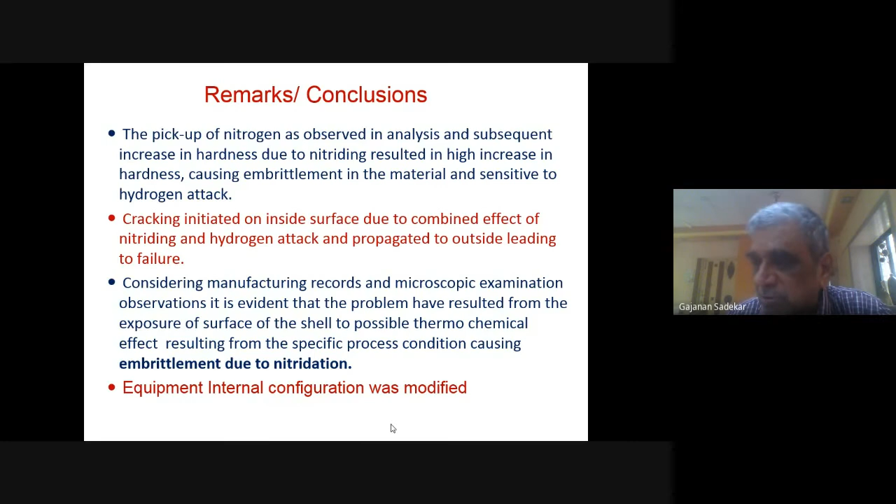Okay, so having seen this case, let us go to the second case. The second case is very interesting, as I told you, it's a creep related case.

There is a dissimilar joint. In this particular case, gases were flowing at a temperature of around 540 degrees centigrade from the reformer, and the material was P91. The initial portion of the material was stainless steel. What was coming out of the reformer, the steam superheater line, the steam was coming out from the reformer, and the major pipe coming out initially was stainless steel, and afterward the steam pipe was P91, a chrome alloy steel.

Now this joint, the stainless steel was welded to the alloy steel, but with a particular configuration. I'm going to show the configuration of the joint.

So here what you see is nothing but we collected all the data on the piping to see what type of support the piping had, what type of constraints were coming on the piping, whether it was giving constraint, because the problem reported was that every 9 months they used to get a crack on this weld and they were required to change the pipeline.

Okay, so this joint, which I'm going to show you in detail next. Here, can you see this joint? This is the dissimilar joint. This is P91, this is stainless steel, and this is the joint. So this joint is the failure location.

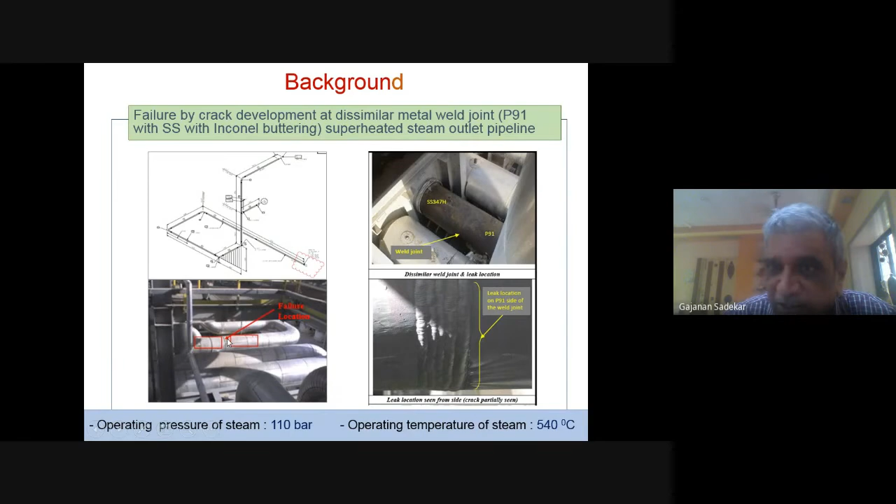So this is a stainless steel pipe, and this is an alloy steel pipe. This is the failure location. These weld details are shown, and this is where the leak occurs. This occurred more or less 3 times at 90 degrees, at a particular location, and leaks keep occurring there.

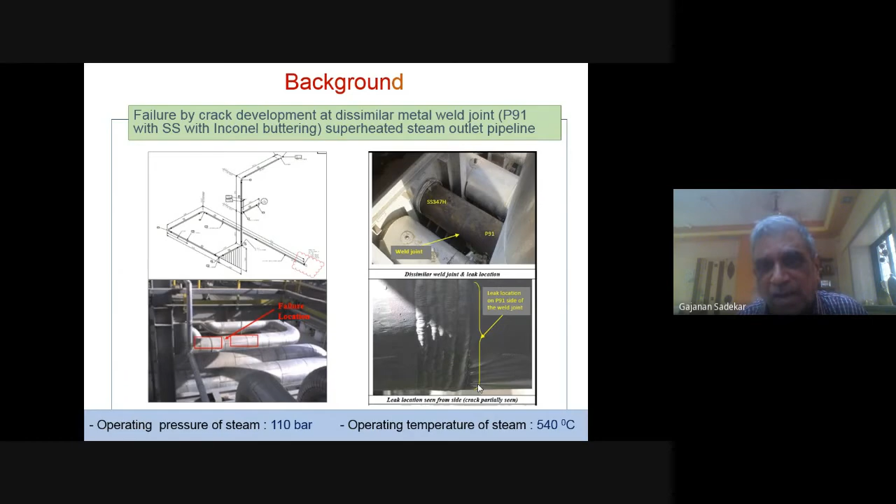So they used to stop the plant and replace the part. Sometimes they used to repair it. Some repairs were very difficult because the configuration was like this.

If you look at this, this is the alloy steel portion of the weld. This is the stainless steel, and this is the weld. But since you cannot weld stainless steel directly with alloy steel, they used to weld the stainless steel first along with the stainless steel, then put Inconel material on it - that's called Inconel buttering. Then Inconel to P91, the alloy steel, was welded. This is how the configuration of the weld was.

Failure occurred 3 times, as I told you. The tentative time of failure after repair is 6 to 12 months. Every time they repaired it, it would fail again like that. So every 6 to 12 months this would fail.

When this case came to us, fortunately we could collect one complete failed sample of that particular portion, since it was occurring many times. They repaired it some 3-4 times, then replaced it with a new pipe. So they said, okay, we'll give you the sample which is available, and they gave us the sample.

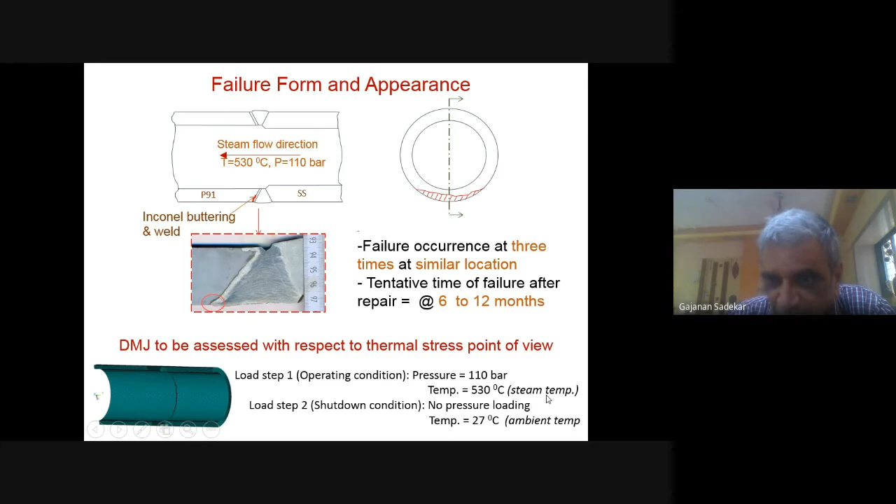Then we did a detailed analysis of it. First, we did an FEM analysis, for both operating condition and shutdown condition - operating condition 110 bar, temperature 530 degrees, no pressure loading but temperature 27 degrees. So we analyzed these particular cases, and found the material stresses in the weld joint.

These are 3 times allowable stress, because these are secondary, thermal stresses. The actual stress calculated is 194, 205, 138. So maximum stresses are less than 3 SM in all 3 cases. So the configuration is safe with respect to immediate failure. If you're someone designing, you'd feel this particular thing is okay, because secondary stresses are kept below 3 SM. But as maximum stresses occur across the thickness, creep life evaluation needs to be carried out.

So we did a creep analysis, and also did a lot of microstructural studies to find out whether creep had occurred.

The first thing is the creep life evaluation. Maximum stresses in the SS region of the pipe are of the order of 138.8, which is well below the maximum allowable stress. So creep assessment is not required there, and this region is safe. The maximum stresses in the Inconel weld region are 205, which are quite higher. Hence creep rupture evaluation is carried out.

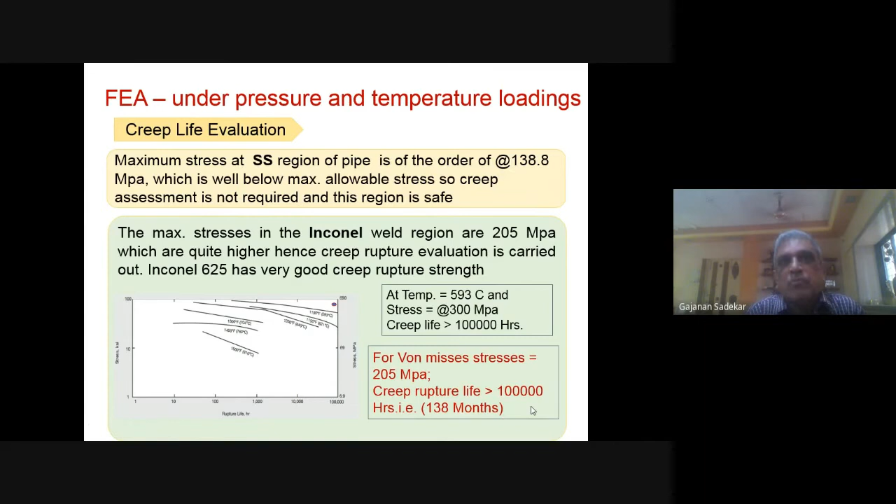So we studied the alloy steel part of it. The maximum stresses in the P91 region are 194 MPa, which is quite high. Hence creep rupture evaluation is carried out, and there we found the creep rupture at the interface between Inconel and alloy steel. Creep rupture life of the P91 region is 9.3 months - after evaluation we found creep life is only 9.3 months.

The P91 region at the P91-to-Inconel interface is more prone to creep failure, and that's exactly what happened - after 6, sometimes 7, sometimes 10 months, that joint develops a crack. So the theory matched what was happening. It's very interesting - creep failure occurs, and when we studied the microstructure, we found creep-type properties, showing the creep phenomena was occurring only at that particular location.

Nowhere else was that effect occurring. So this was done. What was done?

We actually decided to change the configuration, putting in a big dissimilar joint. We decided not to have that type of dissimilar joint with the constraints close to the weld, with buttering and all that. Instead, we put a big piece of Inconel, a big piece of stainless steel, a big piece of Inconel, and things like that, based on some analysis.

After replacement, now for something like 6 years, no failure has occurred. So this case study shows you how analysis can help you do that.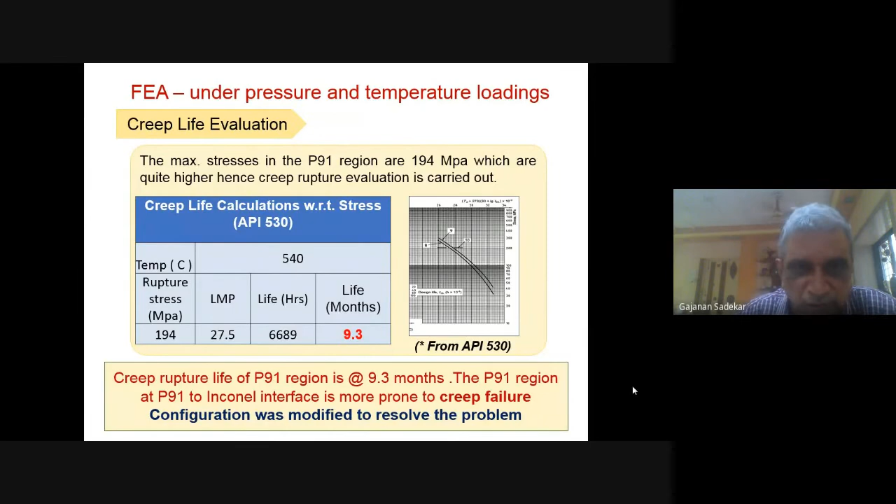Let us go to the third case study. This equipment is again in a fertilizer plant. This equipment was supplied, and all radiography, all NDTs were done, everything was done. After operation, after something like 1.5 years, because generally all fertilizer plants carry out NDT of the major weld seams on critical equipment, to see whether any cracks have developed. So on this equipment, they carried out the NDT and found that at this location there's a crack on the weld seam.

That crack was observed in the ultrasonic testing, and then the question became whether this crack would grow in operation, and whether it was originally existing. Our radiographic films were not showing the crack, but the crack existed after 1.5 years. So they said, oh, you might have missed it during that inspection.

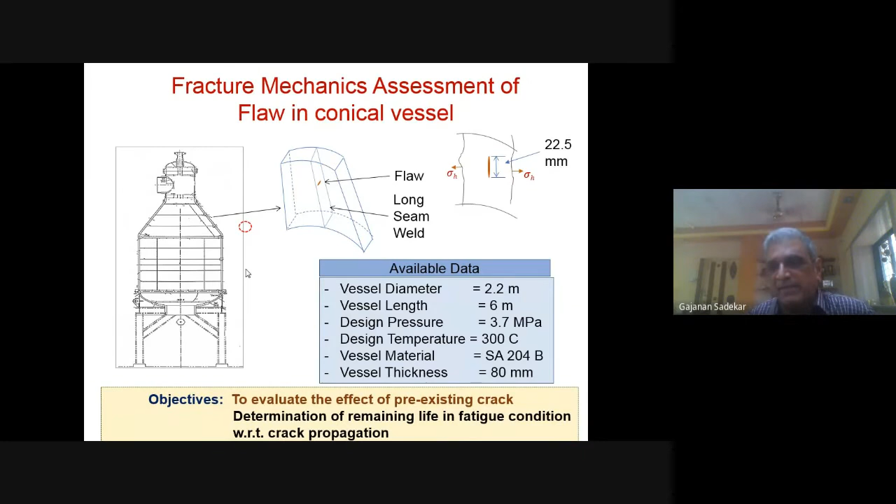But anyway, what was decided was to carry out the analysis, and we carried out linear elastic fracture mechanics calculations. I'm not going to go through these calculations because Professor Naik is going to tell you about how to calculate stress intensity and related fracture toughness in a subsequent lecture.

So I don't want to explain the methodology, but I'll tell you the result. We found that the stress intensity was much less than the fracture toughness. The KI value was 23.3 and KIC was 61.42, so KI was less than KIC. We said the equipment is safe with the existing crack.

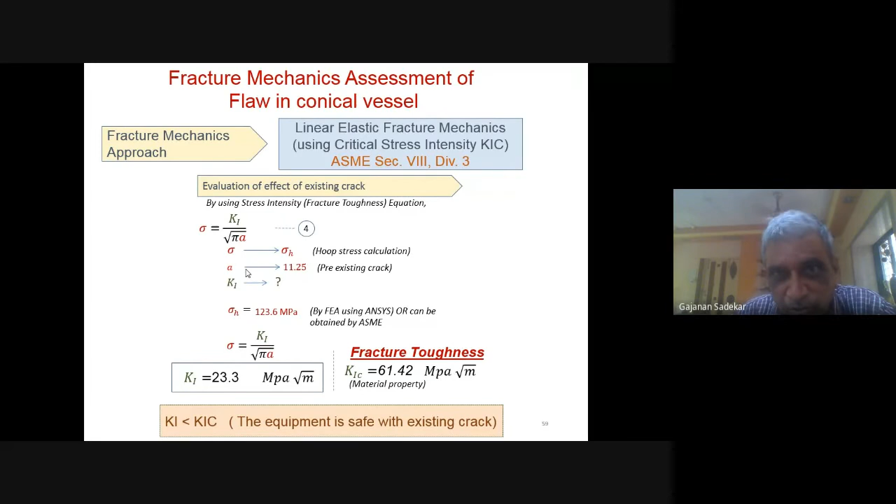That's what we decided. We further calculated the crack growth rate. This KIC was calculated using ASME Section VIII, Division 3, since there's a methodology given there. But we also did FE analysis to find the KI value, and more or less the same 23.5 KI value came in both cases.

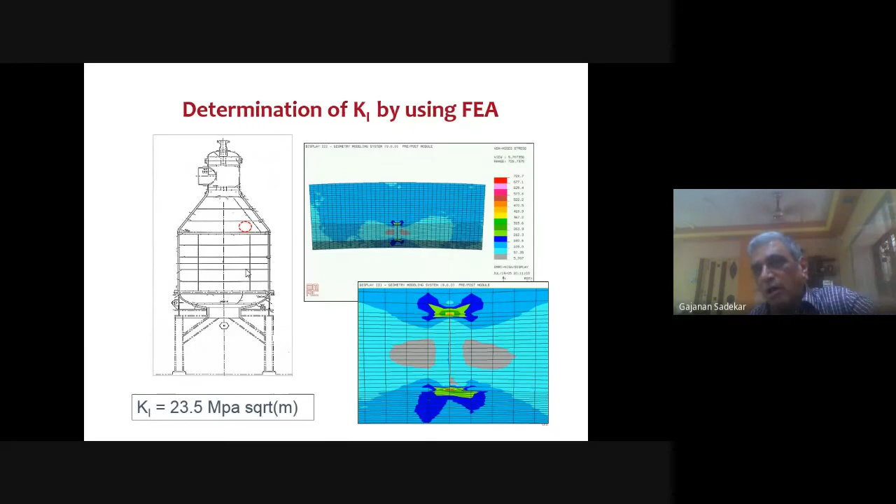So it looked okay. Then we further did calculations of the critical crack length, and the critical crack length was much higher than the actual thickness, so we said the vessel will leak and will not burst. At the end, we calculated the number of cycles it will withstand to determine the remaining life of the equipment, and found the actual cycles it can undergo is 66,000, whereas the actual operating cycles were only 1,000.

So we said in this case there is no problem. We guaranteed the plant that this equipment will never fail. And I want to tell you, this is now approximately 14 years, no, more than that, 16 years, and the equipment is still working.

The crack has absolutely not grown. They check every 2 or 3 years, checking the crack length, and I understand the crack length has not grown even a little. So whatever the crack is, it still exists as is. Just look at the power of that analysis. If the crack exists, somebody might say, oh, now what to do, replace the equipment? Not necessary.

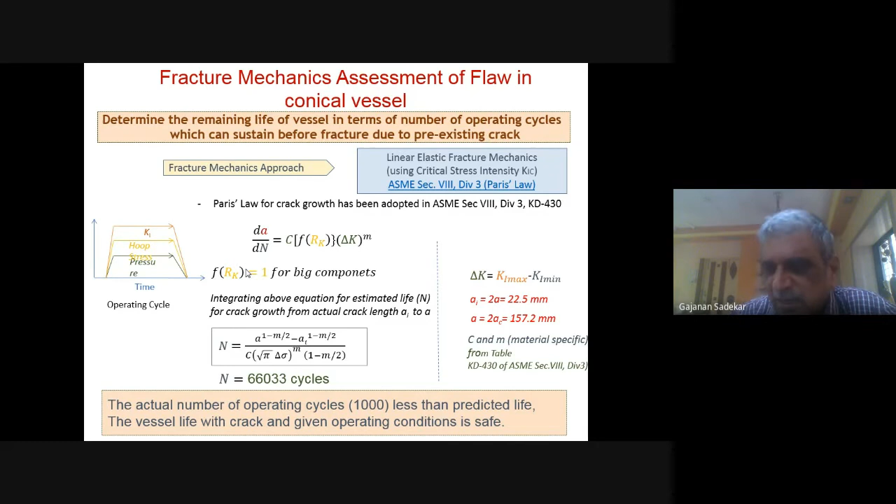One can actually do the analysis and feel that equipment can be used. I'm going to go for the fourth case study, which is very unique. This is actually heat exchangers.

If you look at this stage, there are two heat exchangers in series. The gas, at a temperature of 204 degrees, enters into the tubes here, comes out, enters into the second exchanger and goes out. Cooling water was there on the shell side. It enters here, goes into this exchanger, then into this exchanger, and goes out.

What happened is this exchanger, after operation of something like 10 months, started leaking. It was supplied by us, and I had an opportunity to visit the site, because though we had supplied it, we had not done any design of this equipment, nor the selection of the material. It was only manufactured by us. Interestingly, the first heat exchanger was manufactured by us, the second one by another manufacturer. And the failure was only in this equipment.

So I went there and had a look at it. The material of the tubes was stainless steel SS304. When I went there, I was told it is leaking. So I went to the site and had a look.

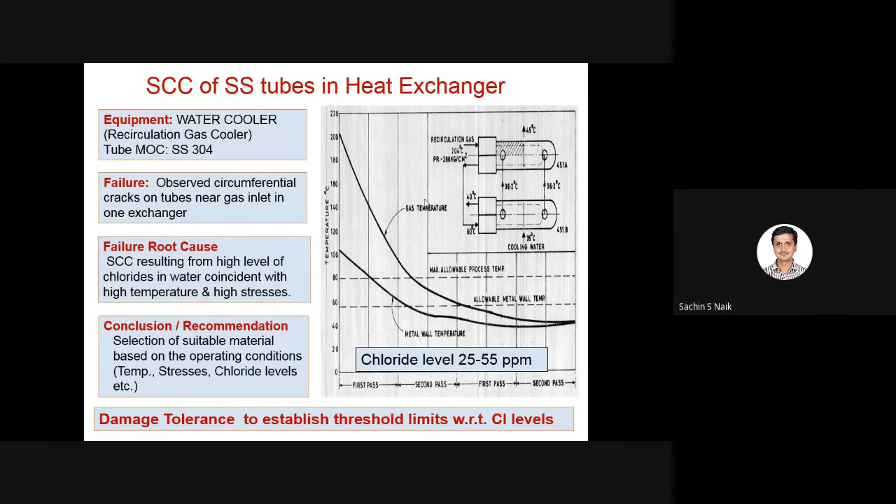So we had a look at the site, and people said, look here, the gas is coming here, going into both exchangers. This exchanger, nothing has happened. This exchanger only has a problem. So after that, I alone stayed there and started studying.

I found that failure had occurred only in a particular zone of the tubes. In the initial period, where the gas enters, the first around 200 millimeters, there was a problem. Cracks were there only in the first 100 millimeters, and the dark surface was there for the first around 200 millimeters. Afterward, the tubes were shining, stainless steel tubes were shining, nothing was there. So I said, very good, let me see.

So immediately, I want to tell you something. I was not knowing much, because I was very young at that time, but I said it's stress corrosion cracking, because I knew a little bit about stress corrosion cracking.

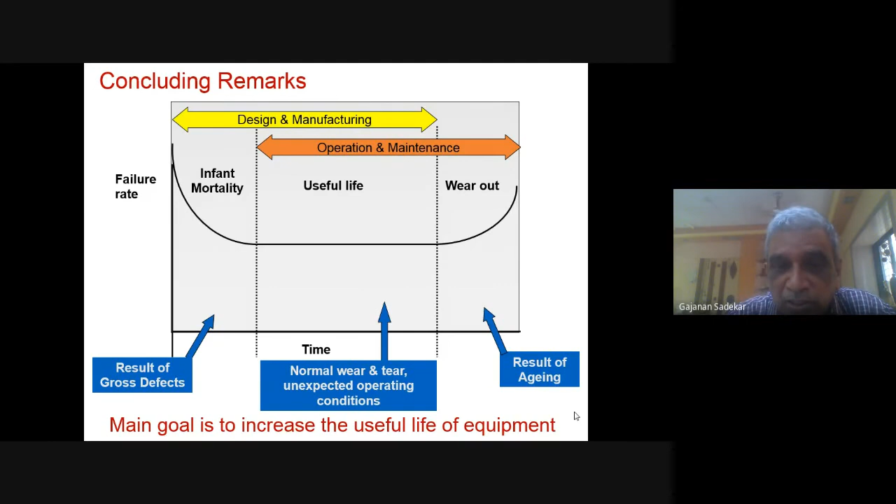And what is our purpose actually? To improve the useful life as much as possible, and not to have infant mortality. Definitely we will take into account the 4 factors to increase useful life. The main goal of the equipment is to increase its useful life - that's what we want to do.

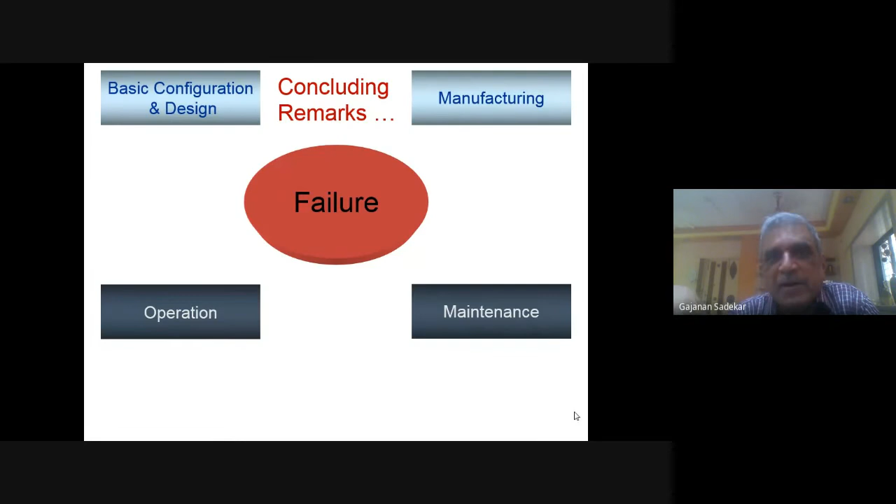So for successful integration of these 4 factors, which are basic factors - if they're treated independently, definitely failure will occur. But if you carry out successful integration of these 4 factors, along with, which is very important, where if the problem comes, do the failure analysis and use damage tolerance methods during the life cycle of the equipment and systems, we can increase the reliability.

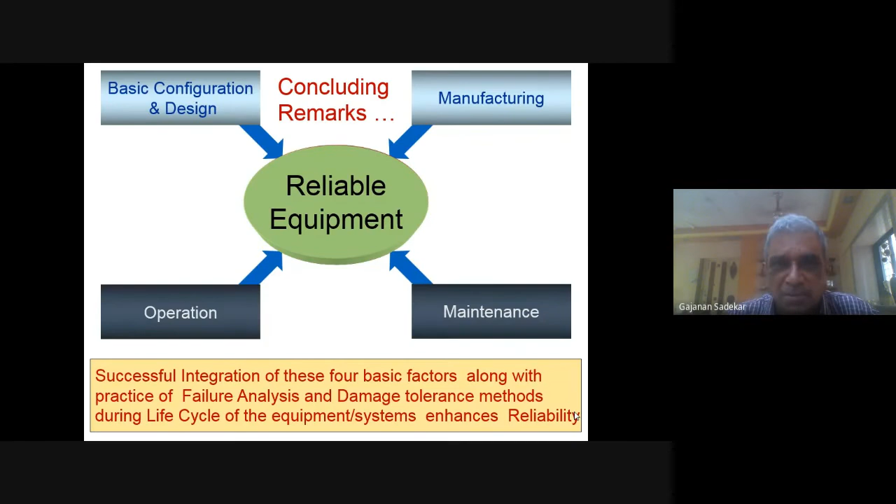So damage tolerance - suppose you find some small cracks in the equipment, do the analysis, find out whether these cracks will grow, how many years can be sustained, what will the crack growth be, how many cycles it can sustain. All that analysis can be done and you can improve reliability. But you must do the failure analysis so that you know the cause, so that proper damage tolerance analysis can be carried out. Damage tolerance has an importance in the operating cycle of the equipment and systems. Use it with judgment and it will give you a lot of good results.

Doing analysis is one part, doing the various detailed study of failure analysis is very important. Okay, so this concludes my presentation.

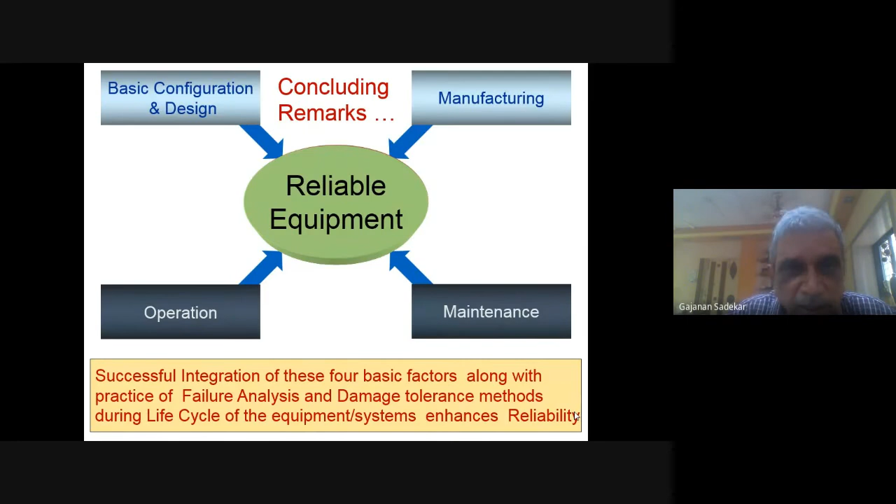But just to give you a small end note - failure is central. I am quoting Professor Henry Petroski, and I like this quote very much, and I think it is apt for our presentation. It says, failure is central to engineering. Every single calculation that an engineer makes is a failure calculation.

I want to tell you, when I read this sentence first, I said, what's wrong, it looks odd - every single calculation that an engineer makes is a failure calculation. But when I read the next sentence - successful engineering is all about understanding how things break or fail - then I said it's complete. Because if I know what type of failure phenomena is likely to occur, then when I do the design calculations, I know whether I've considered all those factors. So every design calculation is actually a failure calculation, because if failure is in my mind, then I will take note of it and do the calculations accordingly, so that failure will not occur. So it's a great quote.

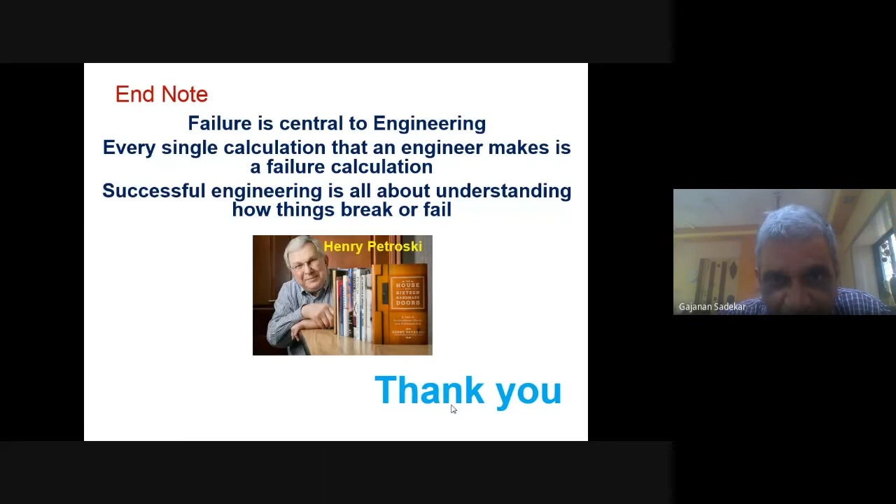Yes, right, yeah, so Henry Petroski was born in 1942. He's an American engineer specialized in failure analysis - why I'm telling this history, I'll tell you at the end of it. He's a professor of civil engineering and history - imagine, civil engineering and history - at Duke University. Before beginning his work at Duke in 1980, Petroski worked at the University of Texas at Austin from 1968 to 1974, and Argonne National Laboratory from 1975 to 1980 as a group leader, where he was responsible for research and development efforts in fracture mechanics.

So he's an expert not only in failure analysis, he's an expert in fracture mechanics. Petroski is the Aleksandar S. Vesic Professor, which is Professor of Civil Engineering and Professor of History at Duke University. In 2004, Petroski was appointed to the United States Nuclear Waste Technical Review Board and was reappointed in 2008.

So he was on the board of Nuclear Waste of the United States. So he's a very renowned person. Petroski has received honorary degrees from several universities - he has received 23 honorary doctorates.

Petroski was honored with the 2014 John P. McGovern Award of Science. He is a registered professional engineer in Texas and a distinguished member of various societies - American Society of Civil Engineers, American Academy of Arts and Sciences, since he is also a history professor, the American Philosophical Society, and National Academy of Engineers. And this is very important - Professor Petroski is also a prolific author.

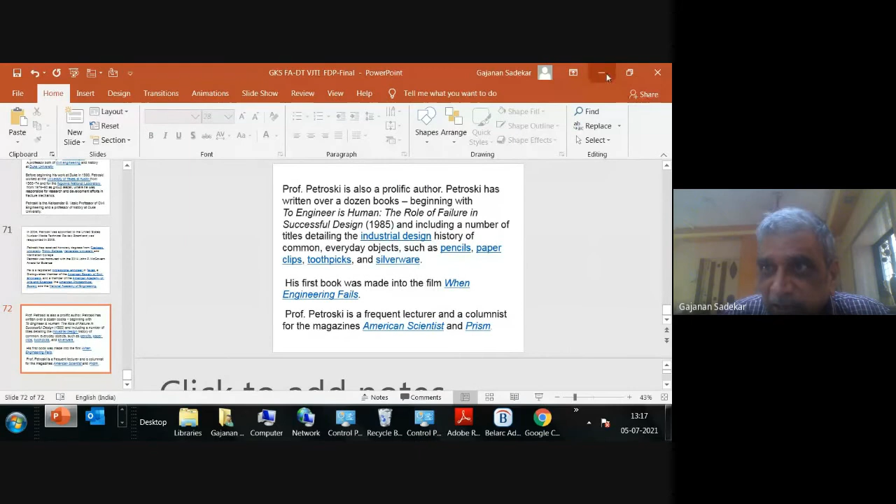Sir, in your absence, I took 2 minutes to give the biography of Professor Petroski. I missed that, sir, I had lost my internet connectivity. Sorry about that. I'll send it to you, sir. Thank you.

Any questions? No? I think I was too fast, or too slow. What was that? No, I think the speed was okay. Maybe it was so well explained that they don't have much questions.

I have some questions, sir. Yeah, okay. You said in the conclusions of the first case study that the process licensors have changed the internal arrangements. But then I was actually expecting that perhaps there would occur some change in the material selection process, but that did not unexpectedly happen.

No, regarding material selection, in some places some people prefer different materials, but actually the major thing was - the advantage of using that material was that other materials are also susceptible, but they are less susceptible compared to this material. But if the internals are not changed, the phenomena of leakage of the catalyst will continue, and it is detrimental to any material being used. So people have changed the configuration of the internals so that at no time will the catalyst come in contact with the surface of the material.